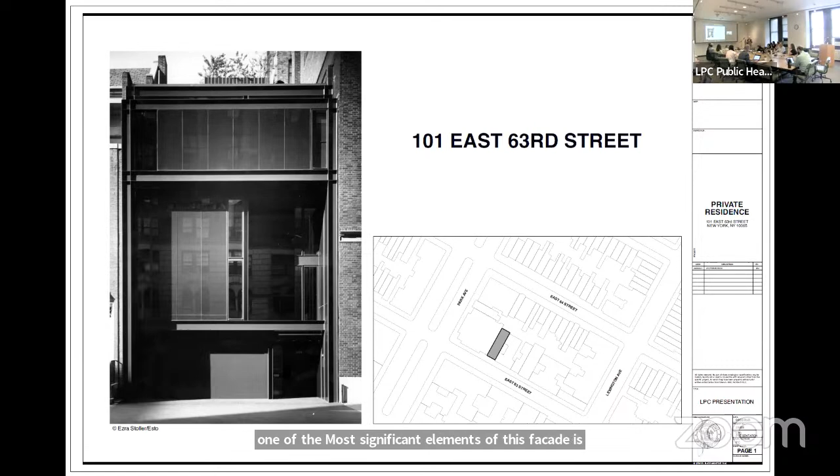And as a result of this, we've found some both logistical and security challenges. Because of the deep inset, it's been a place where people have gathered for smoking, public urination, and even frequently sleeping. Because the door opens to the outside rather than to the inside, there have been many times where the owner was essentially trapped in his home and was unable to leave because there were loiterers sheltering in the space.

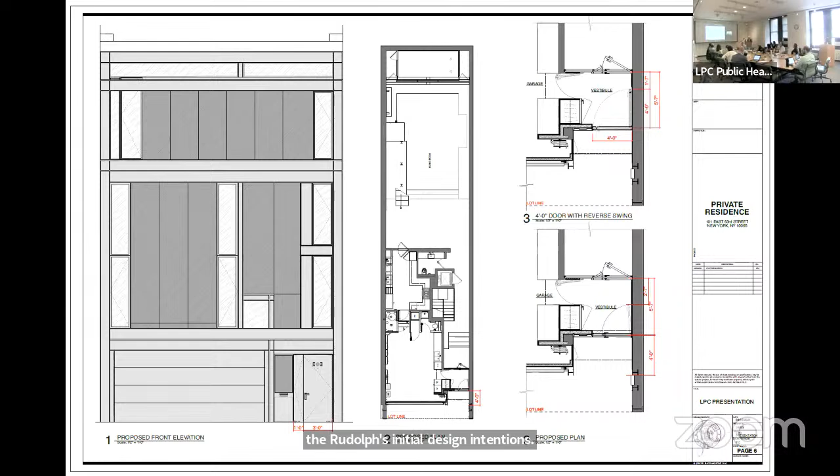Here you can see our new solution that we're presenting today. We're proposing to keep everything in the same plane that it is. The door remains in the same plane. However, what we would like to do is to split the door to create a 3-foot door opening that would open in. And this matches Rudolph's design solution for the interior vestibule. He has a split door there, which remains today. And so we would be duplicating that.

And the reason that we need to split the door is because the vestibule itself is rather tight. It's only 5'7" deep, and a 4-foot door opening into that space is just too congested. And it's also essential that the door open in so that if there is anyone sheltering in the exterior vestibule, the owner is able to open the door.

Up here you can see how much space the 4-foot door would be taking up if we were to just change the swing. And in the lower plan, we're showing the split door, which matches the door in the interior of the vestibule.

Now, in addition to the modification to the entrance door, I should also mention that we would be planning to reuse the existing door handle and address letters, which are original to the home, and we would replace them on this door. The door would be of the same material as the existing. It's a metal clad wood door that's painted to match the rest of the steel facade.

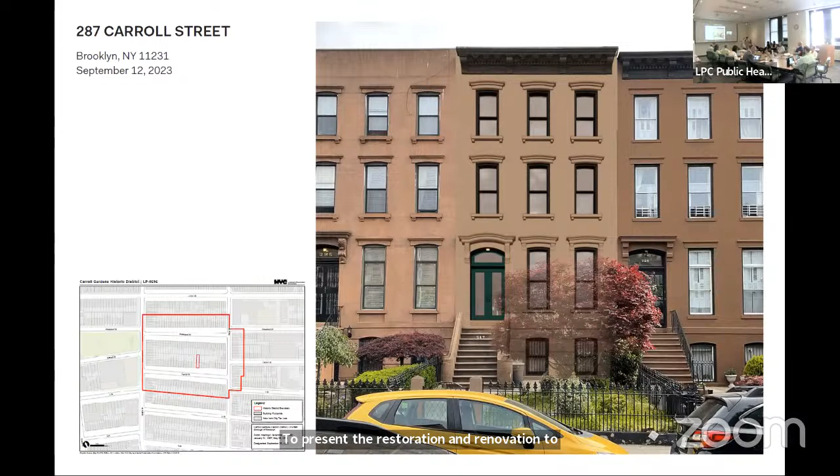The original building was built by William J. Bedell and dates back to 1874. We are proposing to renovate the property into a passive house that uses zero energy, with a new rear yard addition to allow additional space for the owners and their growing family.

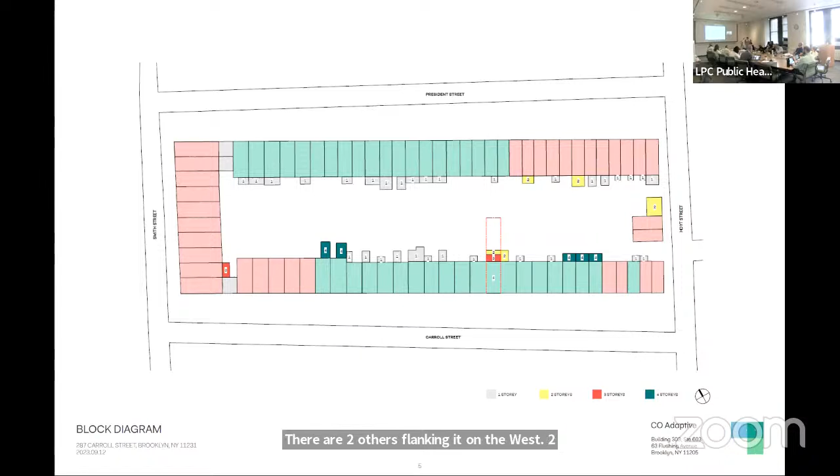This is the block diagram of this particular block showing 2 points of visibility from Hoyt Street. You will notice that there are 3 buildings, 297, 299, and 301 Carroll Street, marked in green, that are a little deeper than the historic neighbors and are 4 stories to the east of our property. There are 2 others flanking it on the west, 265 and 263, that also have 4-story additions, extending back further into the rear yards, although these are not full width.

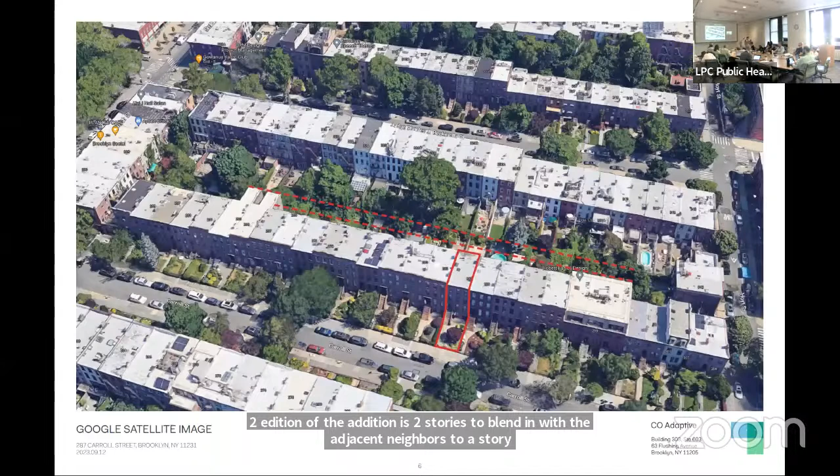We are proposing a tiered 3-story addition to 287 Carroll Street, highlighted on this block plan in red. The lower portion of the addition is 2 stories to blend in with the adjacent neighbor's 2-story addition. This Google satellite image gives additional context and shows the relationship of 287 to the deeper buildings on the east and west on the same block. It's worth noting here that the front facade has a deep 30-foot setback from the public street.

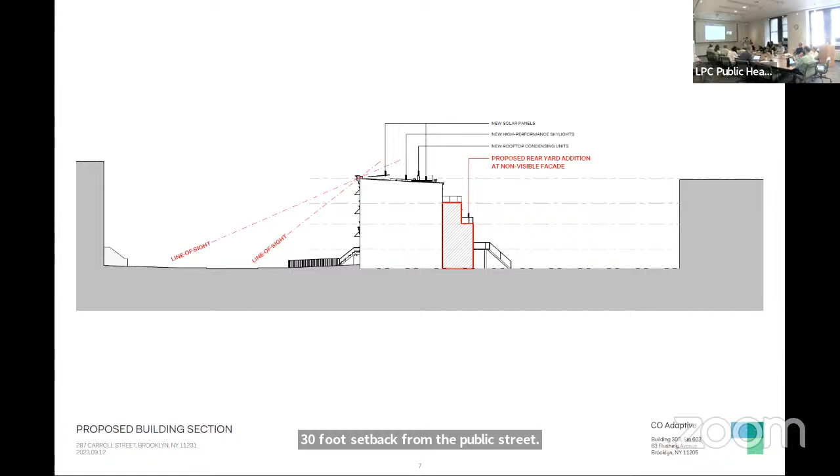This is the proposed building section. There will be new solar panels, skylights, and condenser units with guardrails on the roof, which have all been confirmed non-visible from Hoyt Street and will be reviewed at staff level. We've mocked up the extension shown here. You'll see that the 2 lower floors will extend as deep as the neighbor at 289 Carroll Street. We've also mocked up the roof additions and determined with the staff that they are not visible from the public vantage points.

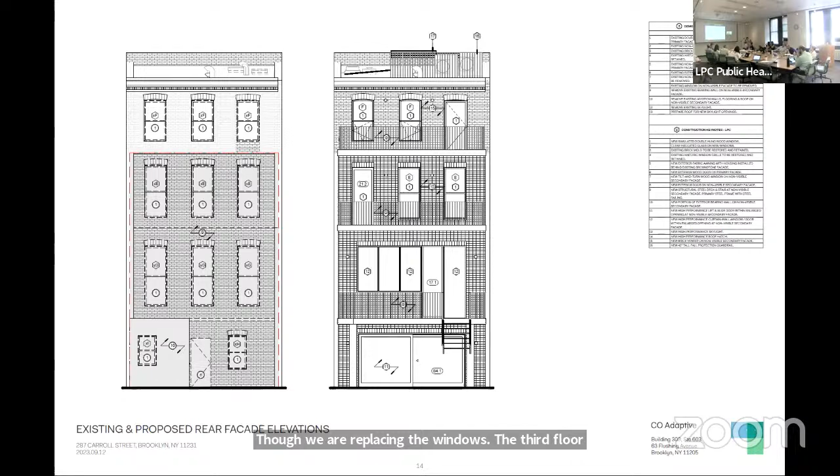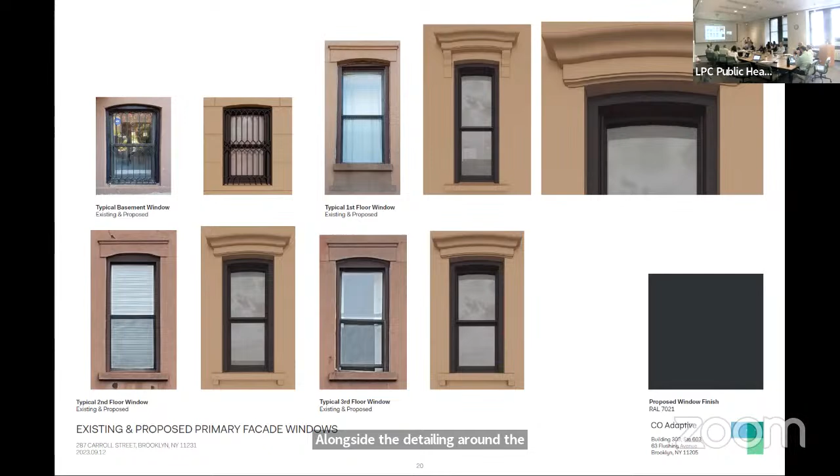The second and third floor front facade windows will also be replaced and set back the same distance. The stone detailing eyebrows at the lintel and sill will also be restored. We are proposing recessed awnings instead of surface mounted awnings to reduce their visibility when they are not in use. Traditional awnings are highly visible when they are not extended and require a significant amount of labor to retract and extend.

Our proposed recessed awnings would be able to be easily switched between extension and retraction, allowing for significantly easier maintenance for the building owners and easy operability between the two, allowing them to seamlessly switch between being able to keep the hot sun out in the summer and allowing the sun's energy to offset heating in the wintertime, without the need to dangerously hang out the window or use scaffolding to move them.

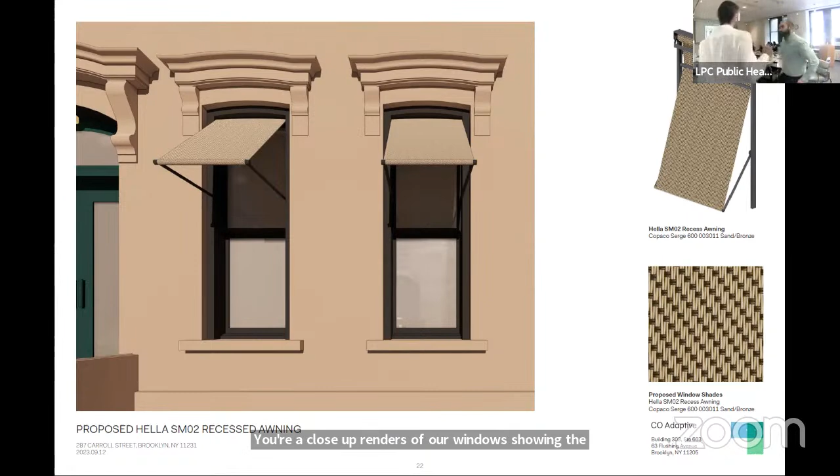Here are close-up renders of our windows showing the proposed glass pane setback, the extended awnings alongside window and shade colors. The shade hardware will be powder coated to match the window frames to minimize their visibility. So this shows them retracted. They become entirely invisible and slot behind the brownstone layer. Our proposed details on page right here show the proposed awning and the setback of the window.

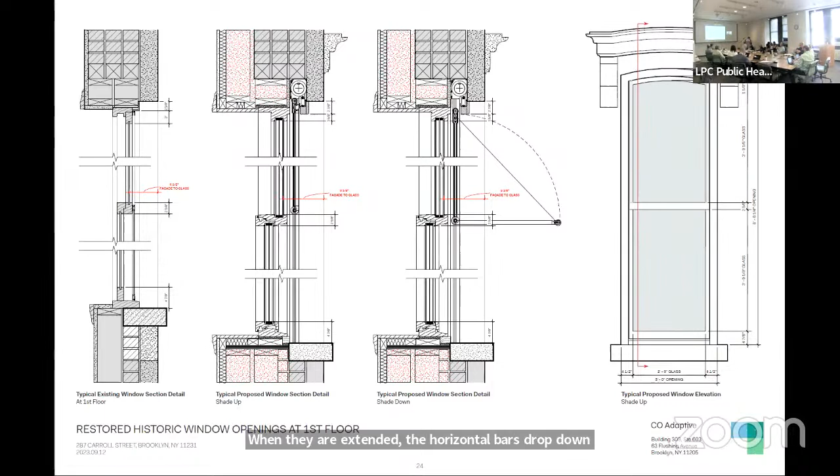The fabric awning can be completely recessed and invisible when they are rolled up and tucked behind the historic brick mold. The horizontal bars of the awning will be hidden behind the brick mold. When they are extended, the horizontal bars drop down to allow the awning arms to swing out, unrolling the fabric. The window opening on the parlor floor will be restored to its original opening size, as you can see here as well. These show the details of the second and third floors where the opening will remain the same. The detail otherwise is very similar.

Here are the existing and proposed window details in plan. As you can see, the face of the brick mold will remain in the existing position in relation to the facade, and the glass is set back a little bit further. And we've tucked the operable part of the awning behind the brick mold, so that is very invisible.

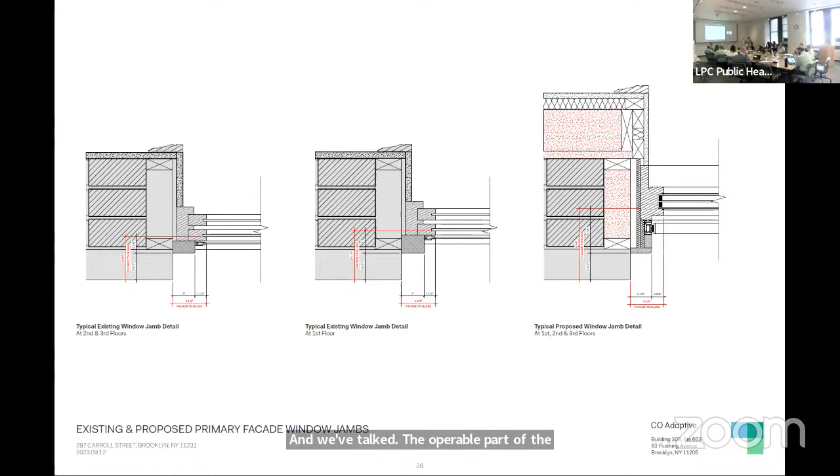its historic state, with a contemporary addition that allows the building to be more resilient in the ever hotter New York City summers. Exterior shading will mean that it can maintain its cool with minimal use of active air conditioning, which unburdens the NYC energy grid and works towards a less carbon intensive future. And with that, I open it up to questions.

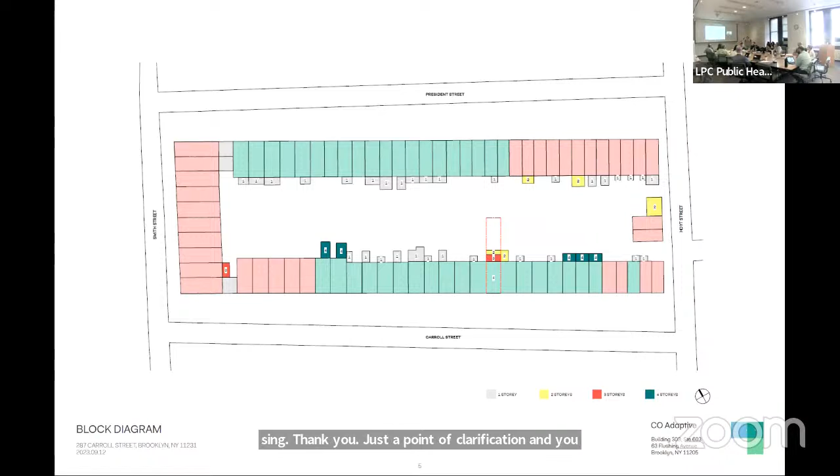Thank you. Just a point of clarification, and you could second this, but the buildings to the right are new buildings that I believe are full height and extend further, not rear additions. So there's really just the 2 to the left that are additions of that story. They go deeper. Yeah. Right, Commissioner Goldblum.

On your rear yard axonometric views, you have kind of a white stripe coping or something. What is that made out of? On top of the brick at the various setbacks. Like a sill or something. See what I mean? Yeah, it's just a break in the brick. It would probably be masonry as well. Should it be made out of brick also, or made out of stone? Stone, exactly. Got it. Thank you.

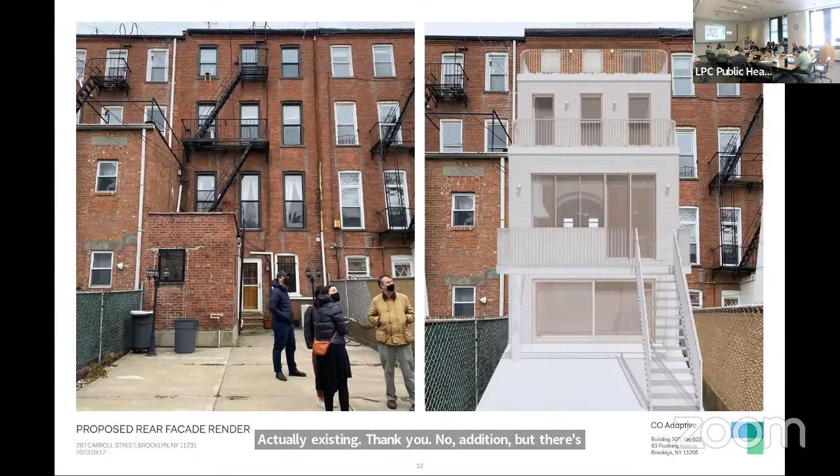All right. Yes, Commissioner Jefferson, and then Commissioner Lutfy. Commissioner Jefferson. The alignment of the existing backyard, your new addition, does it align or is it larger? It aligns with its neighbor. It does align? Okay, thank you. The two bottom floors, that is, the top floor then juts out beyond. And how deep is the top floor? I'm not sure that I have that dimension in here. I can probably answer that by looking it up for you. Okay.

Sure. Commissioner Lutfy. Yeah, this is sort of an information question. The shades, I'm just wondering how much more energy you save with the shades versus having solar shades on the inside. We found in mapping this out on other projects that we do, that exterior shading is in some way the biggest bang for your buck. If you were to do one thing on a building, that makes a humongous difference on the amount of energy that it reduces for cooling. Thank you. Okay, other questions?

All right, I don't see any other questions at the time, so we'll move to public testimony. And first, I'll just confirm, is there anyone in the room who wishes to speak on this item? All right, not seeing anyone in the room, I will turn it over to Gregory Kala to see if we have any remote participants. Thank you, Chair Carroll. We received one sign up in advance for this item, and I see two hands raised. So we'll first be hearing from Christina Conroy from the Victorian Society of New York. So Christina Conroy, I'm promoting you to panelist right now. If you could please state your name for the record and unmute your line, you'll have 3 minutes to speak. Thank you.

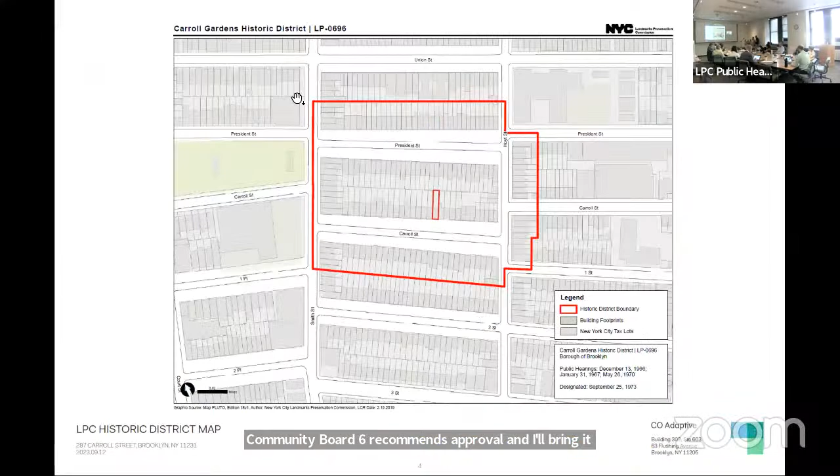And just to clarify for the Victorian Society, the aspects of the windows that we're reviewing. The rules do allow the staff to approve high performance windows that have a change in operation as long as the plane of the top sash and the plane of the bottom sash and their relationship to each other remains and matches the historic condition, as well as the profiles and details of the window, including the brick mold and the arch. The windows are before us today because they are being set back within the opening to accommodate the integral awning, which we're reviewing. And now I'd like to turn to the applicant and ask if you'd like to respond to the other comments in the testimony.

I just wanted to add, and maybe I'll go back to the images of the rear facades, that the reason why we propose the light brick is because a significant amount of the buildings on this block have been stuccoed or painted and are light at the rear facade. Okay. Commissioners, do we have any final questions? Yes, Commissioner Lutfy. Are those buildings across or are they next to the? This particular view is across. And then along here, you can see there's some that are in line with us that are also white or light gray. Thank you. All right, thank you.

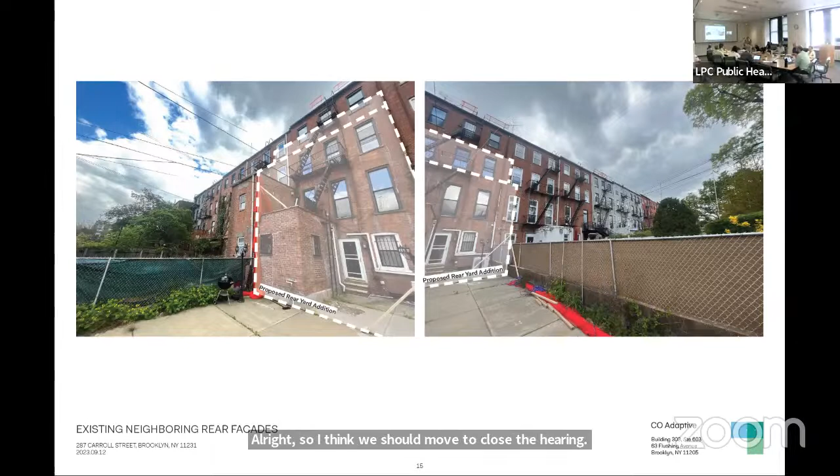Any other final questions? All right, so I think we should move to close the hearing and begin our discussion. Commissioner Master, would you make a motion to close the hearing? So moved. Thank you. And Commissioner Jefferson, would you second that motion? Second. All in favor, say aye. Aye. Any opposed? Okay, the hearing is closed and we'll begin our discussion.

And so as I said, on the front facade, we are only looking at the windows because of their setback location. And then we're looking at the integral awnings. And as we know, historically, row houses, as well as almost every other building type, did use awnings as a means of shade. So they are emulating the historic slope and shape of historic awnings. And then at the rear facade, we're looking at the tiered 3-story rear yard addition. And so we'll begin our discussion. Commissioner Ginsburg, would you like to start this one?

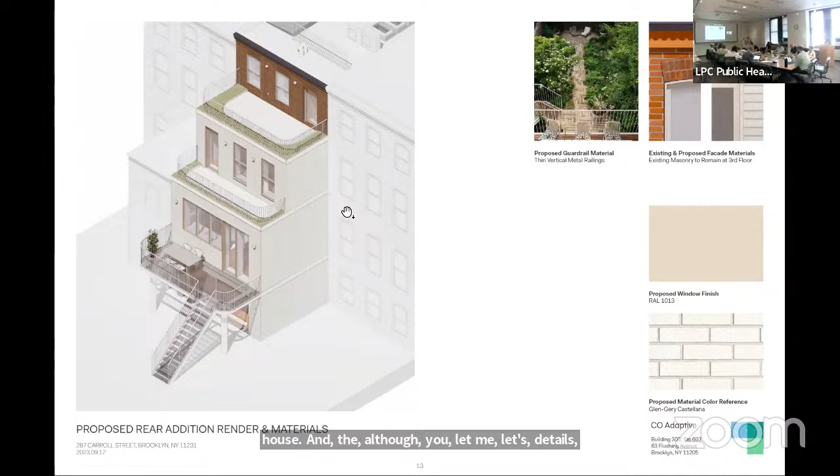Thank you. First of all, I want to compliment you on doing passive house, and although you didn't show it, had you not done passive house, those details looked good. I think the recess of those windows in the front of this is an elegant detail to deal with the need to shade it, and also putting the windows back just inherently will shade them by the building. So I have no issues with that or anything on the front facade.

On the rear facade, I have a feeling we're going to have discussion, but I don't mind the third floor addition. It is set back. The windows do line up with the existing windows. I question a little bit the bright white color, and maybe a light gray would be better. And I also question the banding at each floor with the stone, which looks to me to be a very modern detail and not necessary, and it could be simplified. But in general, I think this is approvable. Thank you. Thank you, Commissioner Goldblum. Okay, thanks.

Not only do I think that the awnings are appropriate, I think that there should be tax incentives, especially in historic districts, for awnings to be not required, but strongly encouraged in historic buildings. Apart from the obvious extraordinary energy gains that they provide, they are a part of New York City history that is completely lost. And I think that they should be on high-rise buildings.

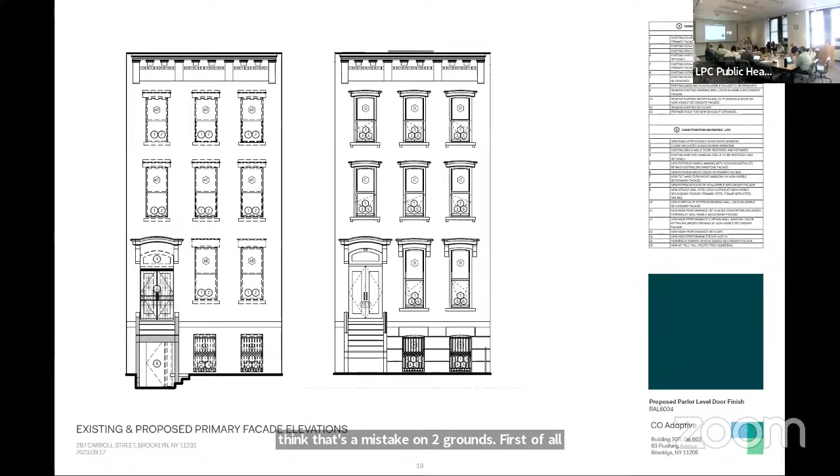I think they're great. The only thing I would suggest is that the color you've chosen is awfully, I don't know, self-effacing. I think that they're trying to look like stone, and I think that's a mistake on two grounds. First of all, they're not stone, and they shouldn't be stone. It would be bizarre to have brownstone infilling the windows. But I think also historically, they were a moment of expression of color and individuality in a typology that was characterized by uniformity.

So I think that you could work with staff on that. That's just a minor little thing, but more power to you, and everybody should do it. I'm going to steal that detail and use it if I get a townhouse. I think that you should look with the staff at the profile of those window heads. They don't look right to me from the renderings and the drawings, but if they are, then that's great.

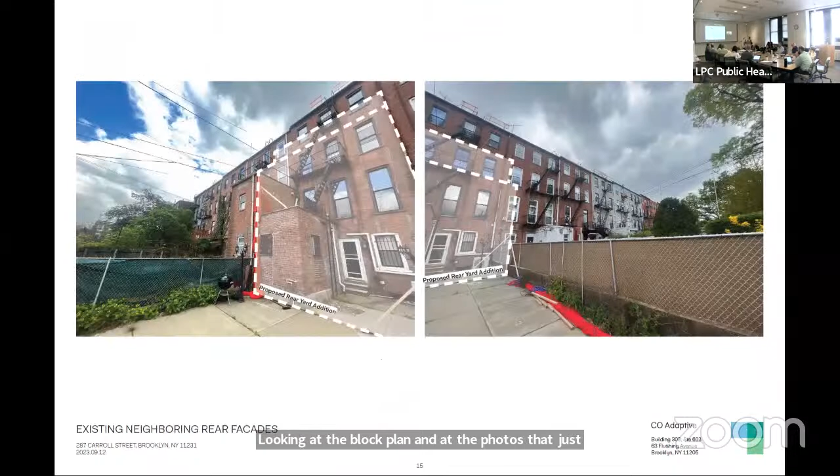In the rear yard, I am unconvinced that the third floor setback addition is appropriate. Looking at the block plan and at the photos that you provided that you just breezed by, even though you do have a few four-story structures, this rear yard is predominantly one story at the basement as a space. And I think that the fact that you have a neighbor with a tail kind of gives you a little bit of an in to do what you've done on the lower two levels. But I think that the third level is inappropriate.

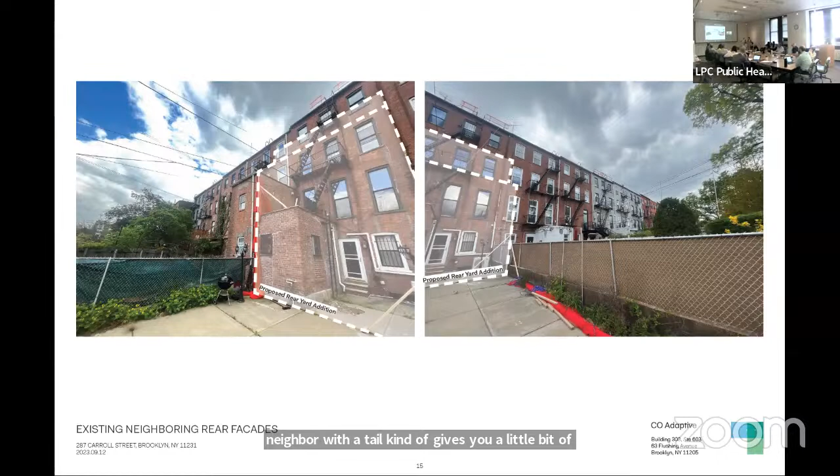The choice of the white brick, while at first I thought, ooh, that's a little unusual, I think in the light of what we permit in rear yard additions, it's rather restrained and totally appropriate, especially in the context that you've sited it. I too kind of had a weird feeling about that coping cap masonry stuff. But again, we kind of focus on little details when that's what's there to focus on. Had the project been much bolder and more assertive, we would have let stuff like that breeze by. So I don't think it's going to render it inappropriate. I think it's okay. Okay, thank you.

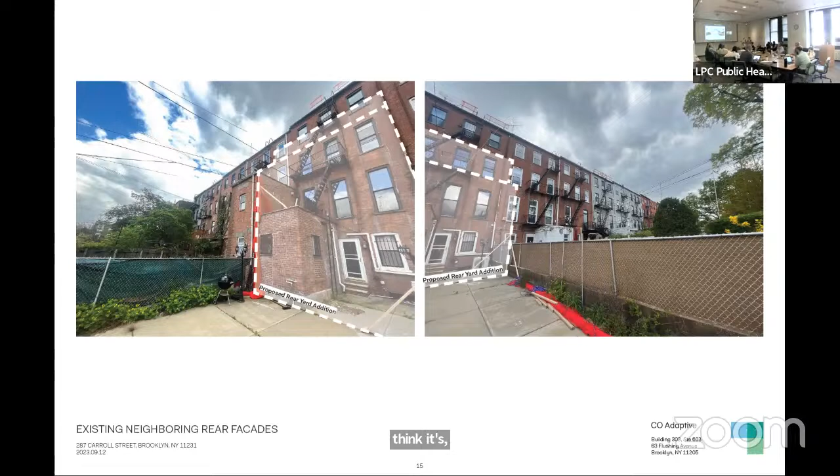Commissioner Holford Smith. Yes, thank you. I agree with my colleagues on their comments. I think the addition of the awnings is a great detail. I agree with Commissioner Goldblum that something that's not just trying to match the stone would be maybe not more appropriate, but maybe more interesting. And I also agree about the rear yard addition, that the third floor in this context is too tall, and the addition should be limited to the two stories.

I also think that a stark white brick is a bit of a contrast, even next to the painted brick and the stucco. So maybe a light gray, like Commissioner Ginsburg suggested, or something a little bit softer than bright white. I think that the stone detail is fine, especially if we eliminate the top floor. Okay, thank you. Commissioner Jefferson.

In terms of the window openings, replication of the eyebrow head is fine. I think that's great. Integral sunshade is appropriate, but I have issues with it in that in a historical block, these fabrics have an image, have a form, and they have a certain quietness to it. When I look at images of 1910, 1920 New York with these awnings, they're all over the place, different colors, different fabric. It becomes a very activated streetscape.

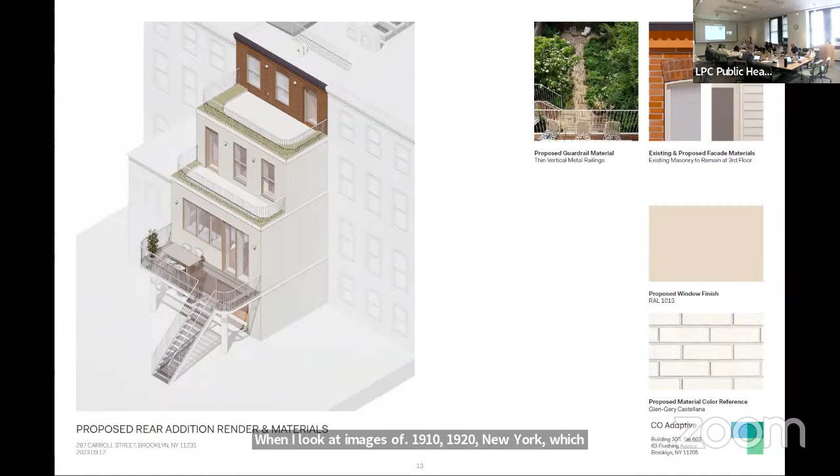Is that what we want? Is that what we're looking for? Or are we looking for a quietness that these brownstones bring? So it's a matter of atmosphere. And the diagram that was shown, everything with a monochromatic color, which is unfair. It's not going to look like that. So that's my concern. And I think it should be two stories instead of three. All right, Commissioner Master.

I agree with the other commissioners. Love the awning. I love the look. I think the front facade, even with the window setback, is perfectly fine. The real question I think here is the rear facade. I don't really have a problem with the white color. The question, of course, is the third floor.

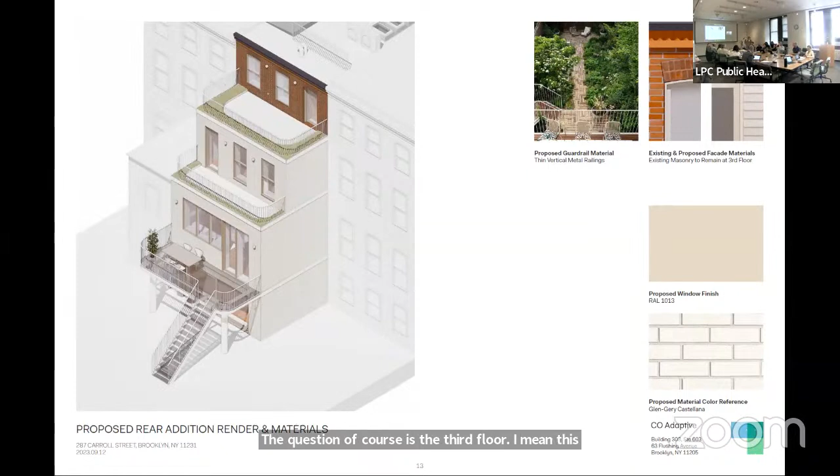This is a tough one. There seem to be other 4-story additions, not in the vicinity, but there, and then some 2-story additions. The thing that makes me more comfortable with the third floor rear addition is the massing; it is set back a little bit, and the rear yard is so deep that I think it would accommodate this rear yard addition. So I think I can find this appropriate.

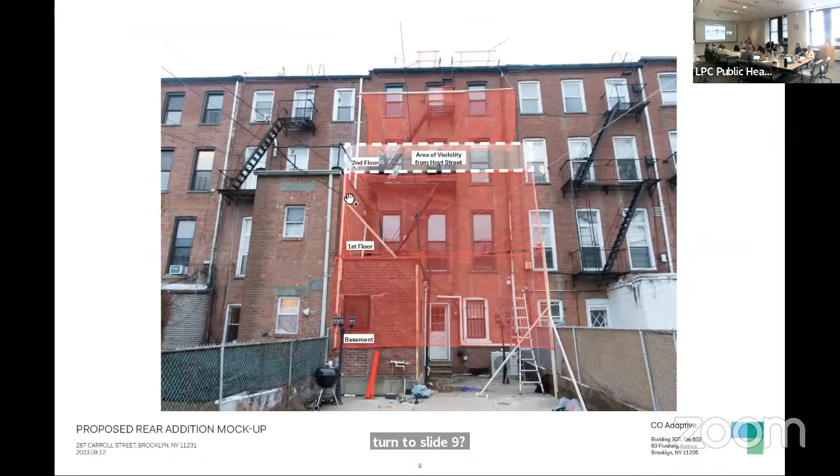Okay, thank you. Commissioner Lutfy. Could you please turn to slide 9? Oh, that was it. That's it. Thank you. Now that I've asked for that, I'm going to talk about the front first.

So I also want to commend the applicant on efforts to make this a passive house, especially in a brownstone, putting solar panels on the roof where there's not a lot of square footage. It's a great thing. I also think the concept of a southern exposure is just so tough from a heat perspective and also from a light perspective, having lived in many, and actually I've loved them. So the shade idea is a great idea, not only from the heat standpoint and the light standpoint, but it is a lovely throwback to something that existed before. And it's so funny that sometimes the original way of doing things is the best way.

But I happen to agree with Everardo that right now in New York City, these brownstone neighborhoods are fairly uniform and look kind of handsome that way. And so my recommendation is that the shade actually be more understated in color, because it's not like tomorrow everybody's going to start doing this. And in fact, who knows how many people will actually pick it up. But I think it would be nice if you don't really disrupt visually what's going on on the street. So does that mean you're comfortable with the brown color? I am. Okay. I actually am very comfortable with it.

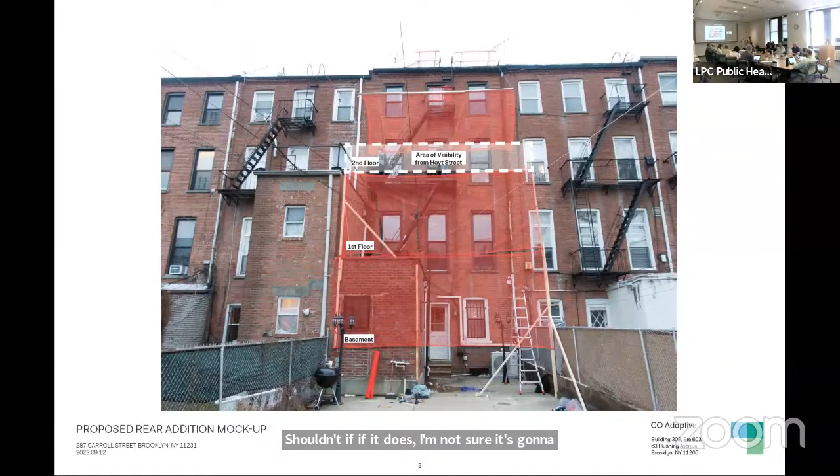The question of the third floor in the rear, I'm a little up in the air on it, as was Commissioner Master. I think because of the size of the block, notwithstanding the fact that the neighbors don't have it yet, it could become a model for how to do it. It is set back. That's helpful. I'm not sure it's going to make it, but if it were not white brick, but a red brick, I wonder if that would help it.

Commissioner Chen. Yeah, very interesting comments by the colleagues. I think we're in agreement at the front. The awning is very nicely done, and I tend to agree with Jeanne that the color should not be popping out. I think it should be more contextual. I agree about the two-story on the base, that on this side there seemed to be more of the brick tone versus on the opposite side the white color.

And if the majority think that the base should be of a lighter color, then I go with the earlier comments that it should be off-white, not so bright. I'm sort of ambivalent about the third floor. I see the struggle here, and so I would defer to the majority.

Okay. So I think we actually have a lot of different comments, and we've come down with enough support for the awnings as proposed in the color as proposed, and enough support for the white brick and banding at the rear yard addition. We are split, however, on the height of the addition. We're sort of split 50-50 on that.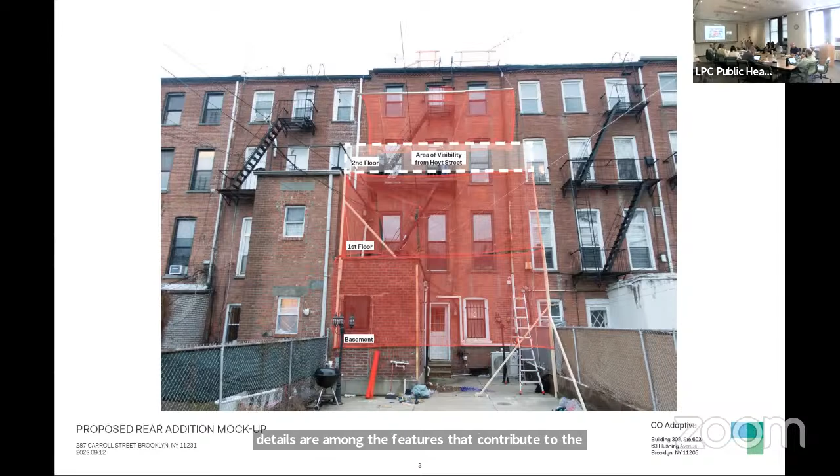I recommend approval with modifications, finding that the construction of a rear yard addition will not damage or eliminate any significant architectural features of the rear facade, that the rear yard addition will only be minimally visible through a gap in the street wall on Hoyt Street and will be seen within the context of neighboring additions, that there are other additions that extend into the center of the block as deeply as the proposed addition, and the work will not diminish the block's central green space, that the design and materiality of the rear yard addition featuring white brick cladding and metal railing will blend with the other brick and stucco rear walls

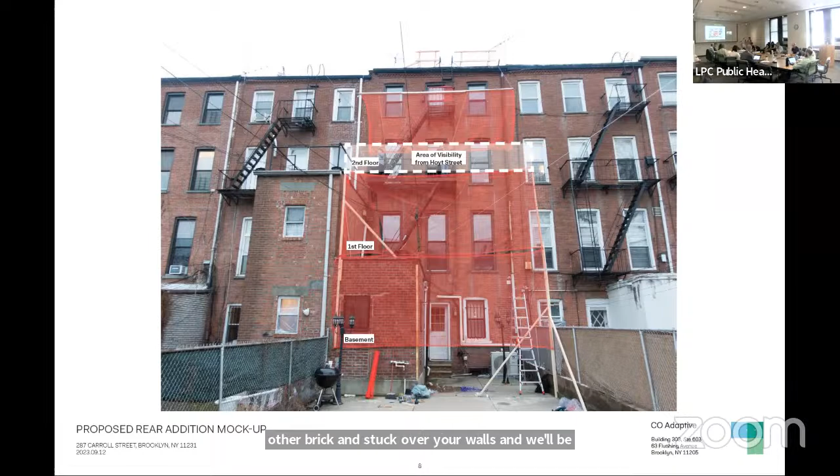and will be in keeping with the residential scale and character of the other buildings in the block, that the built awnings at the windows in the front of the facade will fit neatly behind the brick mold, and in the stored position, the rolled fabric will be hidden above the top rail of the curved sash without obstructing the curve of the window frame, and that the building is set back approximately 30 feet from the sidewalk, so the changes in the depth of the window within the facade will be difficult to discern from the public thoroughfare.

However, I find that the proposed 3-story rear yard addition is taller than the majority of the other rear yard additions within the block, where there are few additions taller than 1 story. Therefore, I recommend that the rear yard addition be lowered by 1 floor to better relate to the other rear yard additions within the block. Right, and I also want to just note that the commissioners who supported the light brick did ask for it to be light gray instead of a bright white. So please work with the staff on final sample color choices.

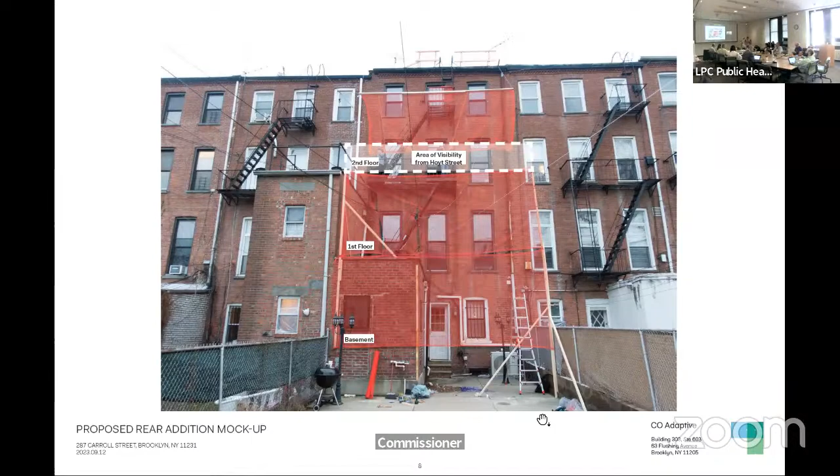Okay. All right, Commissioner Chen, would you second that motion? Second. Mark, will you call the vote? Chair Carroll, Aye. Commissioner Bland, Aye. Commissioner Chen, Aye. Commissioner Ginsburg, Aye. Commissioner Goldblum, Aye. Commissioner Jefferson, Aye. Commissioner Lutfi, Aye. Commissioner Master, Aye. Commissioner Holford Smith, Aye. With 9 in favor and none opposed, the motion passes. All right, that's approved. Thank you. And please continue to work with the staff.

All right, we move to the next hearing item. Next item is public hearing item number 2, LPC 22-11107. This is an application for a certificate of appropriateness in the Borough of Queens, block 1277, lot 58, 35-25 77th Street in the Jackson Heights Historic District. A neo-Georgian style apartment building designed by Joshua Tabachnik and built in 1936. And the application is to establish a master plan governing the future installation of windows.

Good morning. I'm Doug Lister. I'm the architect for this project. I'm presenting two buildings, 3525 77th Street, and then I'll immediately follow with 3524 78th Street. These two buildings are part of... I'm sorry, I'll go to the... sorry. So the two buildings are very similar.

On the left, there's a 1940s tax photo, and on the right are the existing conditions of 3525 77th Street. As you can see, the building originally had steel casement windows, and we believe that all of the steel casement windows were replaced in the 1980s. There's no remaining original fabric. And these are photos. Excuse me, I'll go back.

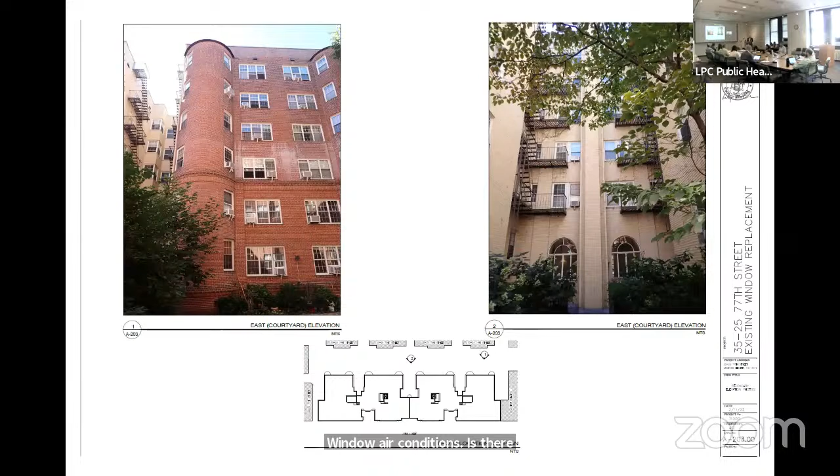I think I'm ready to go on to the next building. It's a very quick presentation. Okay. We're not going to go into that one until we act on one, and then we'll do the other one. Okay, sorry. All right, but it's a block of multiple buildings that were built in a uniform neo-Georgian design with all of the same windows and details. And so we're going to look at this one application, and I think we can apply our decision to the next application. So, commissioners, are there any questions?

Are there drawings of the proposed windows? And are there any changes to what's there, or is it just like, oh, there we go. So the original, I'll show you some details. Yeah, I'll just quickly. The original details do not have a brick mold of any sort. It's just a flat perimeter. And we proposed to replicate the brick mold that is on the original building on 35th Avenue, which is one of the three buildings which we're not presenting today because it does not require a public hearing.

And where is that brick mold on these drawings? Right here on the proposed, and also on the plan. Right, it's right in here. This is the original, or the existing shows no brick mold at all. It's just flat. Again, that's a replacement window.

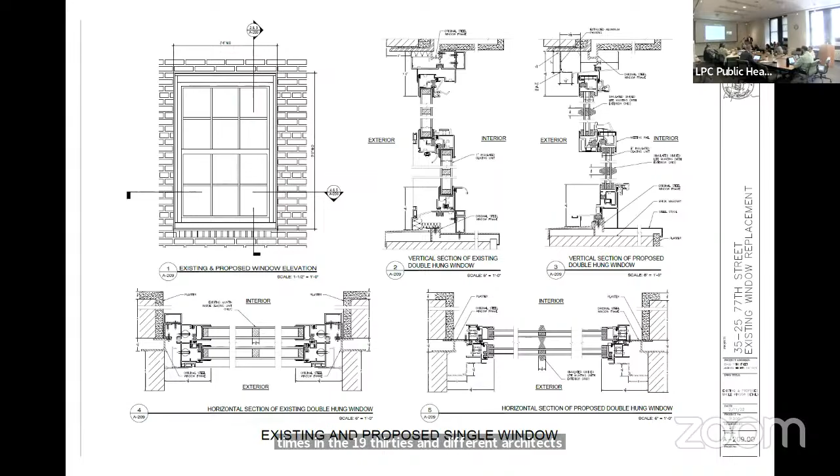All right, let's see if we have public testimony. Is there anyone in the room who wishes to speak on this item? Please come up to the mic and state your name for the record, and you'll have 3 minutes to speak. Okay.

Good morning. My name is Wanda Chin. I'm pleased to have the opportunity to speak at this public hearing with the commissioners. And thank you so much for your dedicated service.

I've been a lifelong resident of Queens County, and I've been a resident and property owner in Jackson Heights since 1986. I remember purposely seeking to purchase in the original garden co-ops back then. And I remember well the creation of the historic district in 1993. I was very actively involved with the community in creating that district.

I have been a shareholder of Burke Owners, which is the cooperative that owns these three buildings, which is 288 units. I've been a shareholder since 2013. I've served on the board of directors for 5 years and currently serve as treasurer. I'm in favor of our proposals for these two buildings, which is LPC 22-11107 and 22-11105. I know we're doing 78th Street next, but I'm speaking about both.

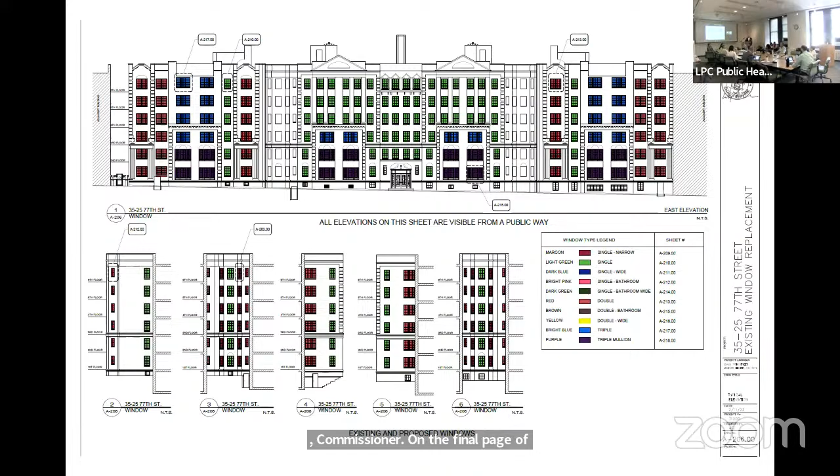Great, thank you very much. Okay, I'd like to ask if you'd like to address any of those comments by the community board. Okay. Commissioners, do we have any final questions? Yes, Commissioner Holford Smith. On the final page of your proposal, there's a sheet of photographs that shows some decorative conditions that haven't been addressed, I don't believe, in your presentation yet. Are you replicating these details?

And we are going to, so there are 12 windows on the front of the building. They're triple bay windows on the first and second floor. And we're going to restore this wood trim, the jambs and the wide mullions on those windows. If I can, I'll go through the... Hold on just a second. So the windows will sit in between those pilasters? Yes, the windows sit in between the...

Sorry, I'm not able to go through the... Pressed the wrong button. There is an elevation that shows... you've got it. That's it. Yeah. Perfect. This elevation shades the 12 windows that we're talking about, and they have wood Neo-Georgian details, and those will be approved. I think they can be approved at staff level. That's why I didn't talk about them during the presentation. Great. Thank you. We're going to restore those.

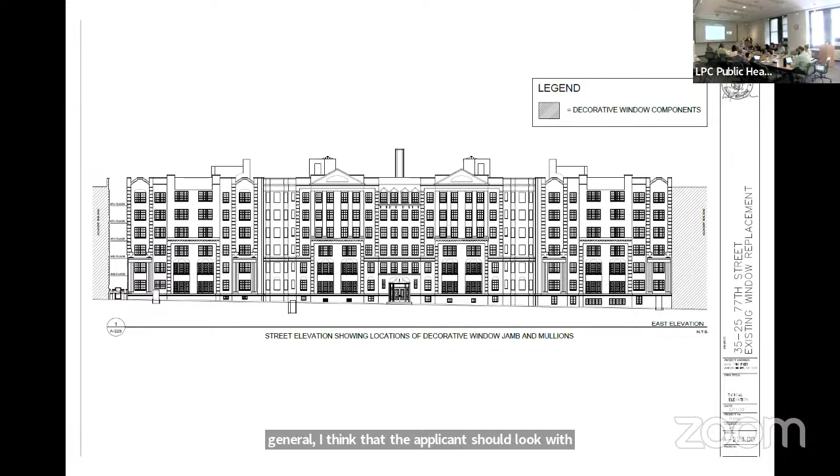I think that the 4.5 inch mass of metal left and right and above these windows is rather heavy, and it may comport with what's there now, which itself is a replacement window that is clearly shown as being kind of cladding over the steel frames that remain. But I don't think that's necessarily our standard.

And looking at the photos of the other buildings, they look to me anyway like the sight lines were better. And I am on the Marvin website. Their typical sight line is 3.5 inches or 3.25 inches. So I think that it would not be very hard to achieve a better sight line and to look at the brick mold.

And the last thing I'm kind of curious about is there any data on the color of the steel windows? My guess from the photo is that they weren't white, but I don't know. From a style perspective, white was probably the way to go with this style, but I don't know. It might be interesting to know that.

All right, thank you. And just to be clear, those larger wood windows are to be restored at staff level. But we can certainly have staff look more closely at the final, so use them as kind of a model for what goes on elsewhere. Understood. Commissioner Holford Smith.

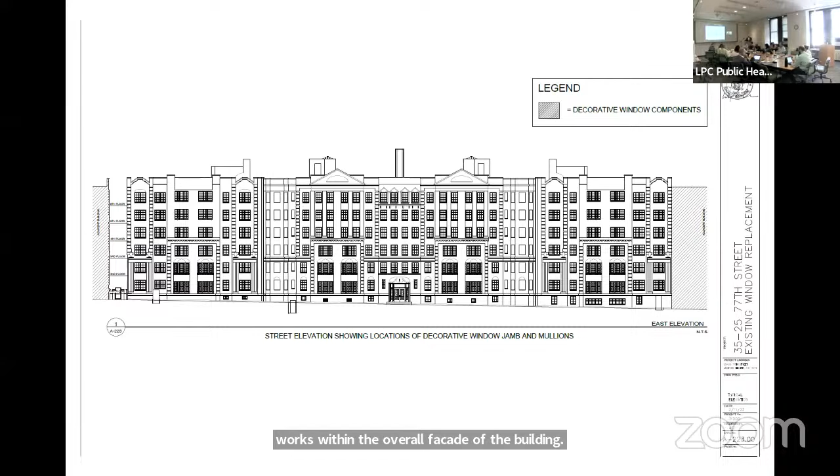That said, I think the most important thing here is the uniformity and making sure that the original 6/6 is going to remain and be consistent, and that it works within the overall facade of the building. I think double hung windows are easier to live with.

And I'm just going to say this in a joking way: not only is it what everyone has, but we're fine with it. The world is getting hotter. People need air conditioning. They need it to be easy. And I think the double hungs are absolutely fine.

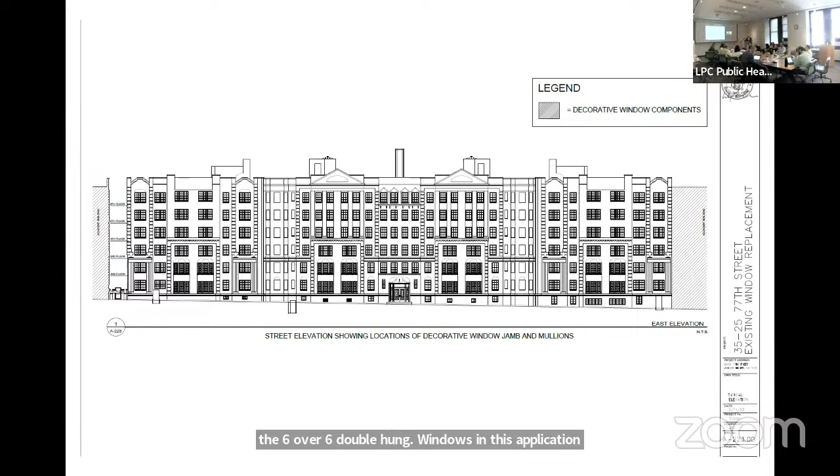All right, so I think we do have a consensus to support the 6/6 double hung windows in this application, but with the condition that they work with staff on the dimension and profile of the brick mold. Vice Chair Bland, would you be able to make that motion?

Seven. 35-25 77th Street, Jackson Heights Historic District. This is a Georgian style apartment building designed by Joshua Tabatchnik in 1936, and the application is to establish a master plan governing future installation of windows. I note that the building's scale, style, materials, and details are the features that contribute to the special architectural and historic character of the Jackson Heights Historic District.

I also note that the historic multi-light steel casement windows were replaced by triple single multi-light double hung windows with a white finish by the designation. Recommend approval that all historic casement windows were replaced prior to designation, that the proposed multi-light windows will maintain the scale and articulation of the original fenestration, that the proposed 6/6 double hung windows with extruded profiles arranged as paired and triple assemblies.

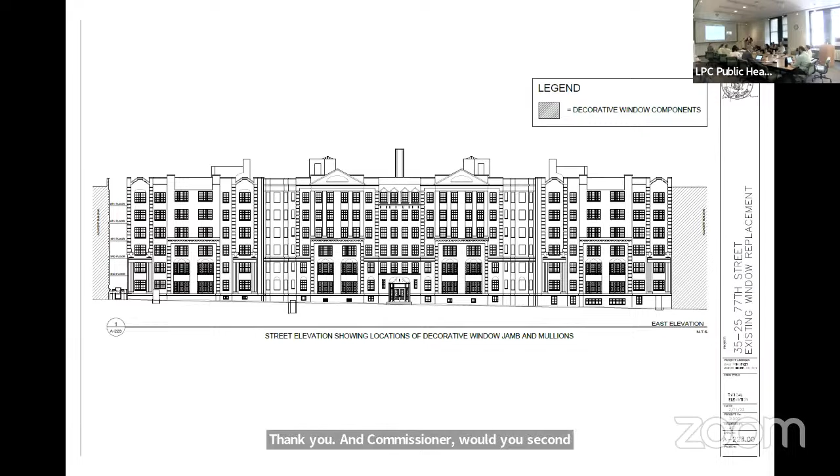Thank you. And Commissioner Lutfi, would you second that motion? Second. Mark, will you call the vote? Chair Carroll. Aye. Commissioner Bland. Aye. Commissioner Chen. Yeah. Commissioner Ginsburg. Nay. Commissioner Goldblum. Aye. Commissioner Jefferson. Aye. Commissioner Lutfi. Aye. Commissioner Master. Aye. Commissioner Holford Smith. Aye. With 7 in favor and 1 opposed, the motion passes. All right, so that's approved.

And we'll move to the next item. Right, and this is the second building in this complex, as the architect previously noted. I'll go ahead and read it into the public hearing. Item number 3, LPC 22-11105, application for certificate of appropriateness, borough of Queens, block 1277, lot 12, 35-24 78th Street in the Jackson Heights Historic District, a neo-Georgian style apartment building designed by Philip Birnbaum and built in 1938. The application is to establish a master plan governing the future installation of windows.

This is very similar to 35-25 77th Street. On the left is a historic photograph. There's actually 2 buildings. This building to the extreme left has double hung windows; that's not under consideration. This is the building here, 35-24 78th Street, that had the steel casement windows. And then to the right is the existing conditions showing the double hung windows. Again, I'm going to go through this pretty quickly.

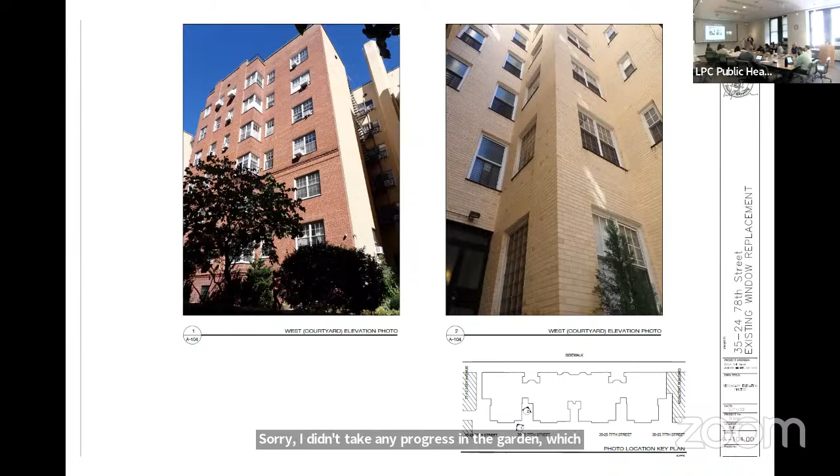On the left is the third building in this complex, 77-12 35th Avenue. On the right is a historic photograph of the buildings directly across the street, 35-25 78th Street, Hampton Court Garden, showing their original double hung windows in a neo-Georgian style. These are existing conditions photographs of the street elevation. Entrance and setback, the street elevation. And these are rear elevation photographs. Sorry, I didn't take any photographs of the garden, which is really one of the most distinctive parts of these buildings. This is the street elevation of the building. That's all I have.

All right, commissioners, any questions? It's another neo-Georgian building in the block that had casement windows, and they're proposing the 6/6 double hung window, similar to the last application. So if there are no questions, I think we've heard testimony on both applications, but let's just see if there's anyone who wants to speak specifically on this application. Yeah, I think she covered it in the first one. And if any member of the public would like to speak on this building, please raise your hands now. Okay, I do not see any hands raised. And as mentioned before, Queens Community Board 3 recommended conditional approval. So I will bring it back to you, Chair Carroll.

Great, thank you. All right, commissioners, if there are no final questions, maybe we should move to our discussion on this one. Let's make a motion to close the hearing. Commissioner Lutfi, would you make the motion to close the hearing? So moved. Vice Chair Bland, would you second that motion? Second. All in favor, say aye. Aye. Any opposed? Okay, the hearing is closed, and this is very similar to the last application. They are proposing a window configuration and operation that is consistent with the neo-Georgian style, but doesn't match the historic casement operation. So Commissioner Jefferson, would you start this one?

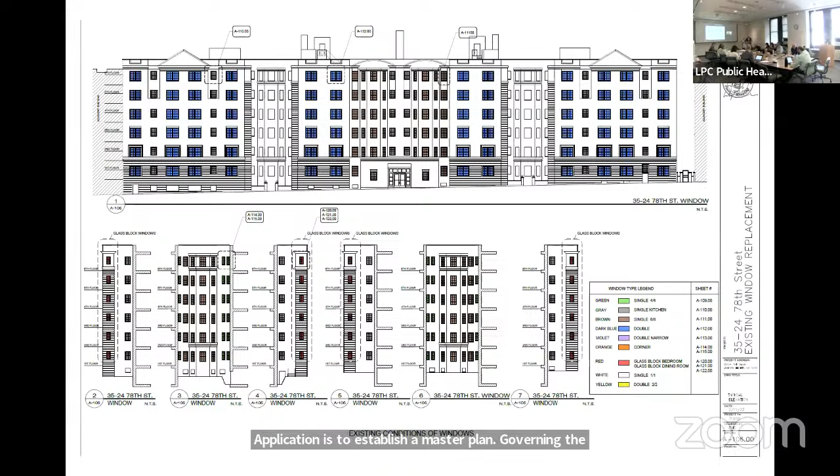I note that the building style, scale, material, and details are among the features, excuse me, that contribute to the special architectural and historical character of the Jackson Heights Historic District. I further note that the historic multi-light steel casement windows were replaced by triple, paired and single multi-light double hung aluminum windows with a white finish prior to designation. I recommend approval,

finding that all the historic casement windows were replaced by the time of designation, that the proposed multi-light windows will maintain a scale and articulation that recalls the original fenestration, that the proposed 6/6 double hung aluminum windows with extruded aluminum profile panning, arranged as paired and triple window assemblies and single units, will be in keeping with the operation, configuration, and detail often found in Neo-Georgian style apartment buildings and will harmonize with the other buildings in the streetscape.

That the white finish of the windows will relate well to the Neo-Georgian style of the building, and that the implementation of the window master plan will maintain and reinforce unity of the fenestration over time. Thank you. And Commissioner Holford-Smith, would you second that motion? I second it. All right, Mark, will you call the vote? I think we need to add the stipulation about working with staff on the details. And that this is conditional on your continuing to work with the staff on the dimension and profiles of the brick mold panning. All right, Mark?

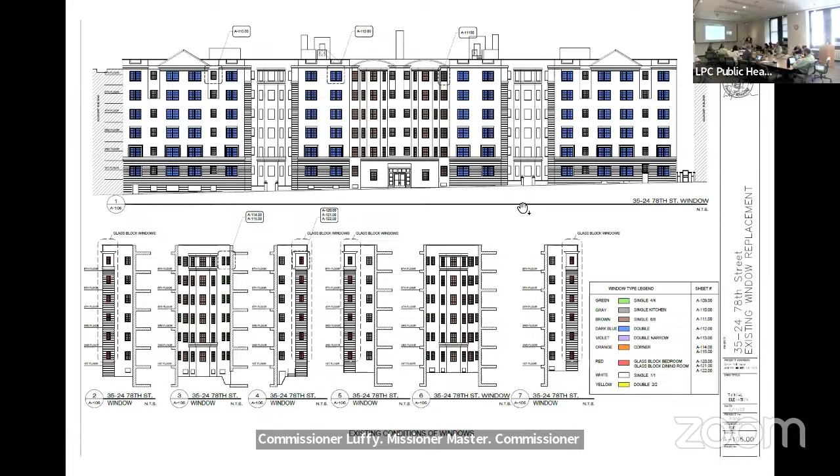Chair Carroll, Aye. Commissioner Bland, Aye. Commissioner Ginsburg, No. Commissioner Goldblum, Aye. Commissioner Jefferson, Aye. Commissioner Lutfi, Aye. Commissioner Master, Aye. Commissioner Holford-Smith, Aye. With 7 in favor and 1 opposed, the motion passes. It's approved. Thank you. All right, we'll move to the next item.

Next item is public hearing item number 4, LPC-23-07926. An application for certificate of appropriateness in the Borough of Queens, block 1448, lot 21. 34-30 88th Street in the Jackson Heights Historic District. This is an Anglo-American garden home, Neo-Georgian style row house designed by C.L. Verone and built in 1925 to 26. The application is to construct a rear dormer.

Good morning, Commissioners. Richard Lai, Preservation Staff. I will be presenting and the architect Robert Kudock is here to answer any questions. So the subject property is located on the western side of 88th Street, midway between 34th and 35th Avenues. The proposal is here before you due to the visibility of the rear dormer and that the work will require the removal of a portion of significant roof terracotta tiles.

And as you can see from the block plan, there are a number of single, double, and triple front and rear dormers, several that were in existence at the time of the 1940s tax photographs. And the commission also approved one, which is this property in the row, in 2015.

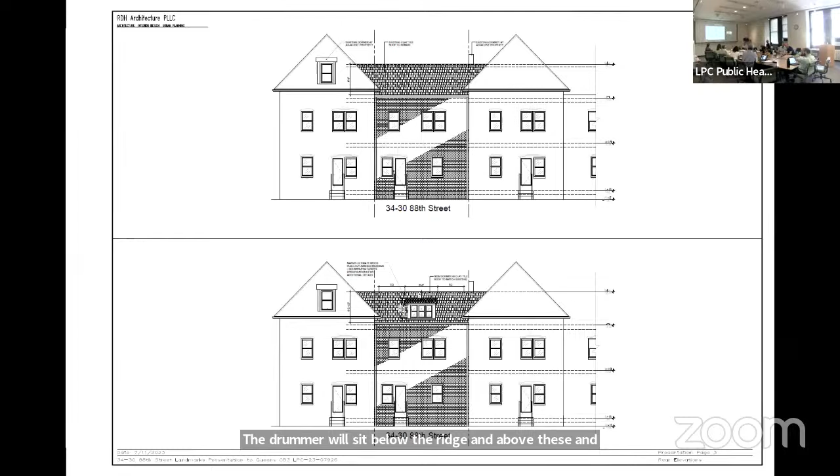The proposed dormer will be constructed of light cream painted wood framing and clapboards with salvaged and new terracotta roof tiles. The dormer will sit below the ridge and above the eaves and centered along the rear pitched roof. The dormer will feature 3 light cream painted awning windows featuring a simulated meeting rail. Here is the roof plan and section showing the dormer will sit below the ridge and above the eaves. Here's an enlarged roof plan. And here is an enlarged section.

And here is a photo from 88th Street looking through a break in the row at the rear pitched roof of the subject property over the central green space. And it's in this location where the proposed dormer would be situated. And here's the same picture, just with the scaled overlay showing the approximate position and design of the rear dormer.

And just a zoomed in shot from the same vantage point. And again, with the overlay, just showing what it would look like. Thank you, commissioners. The architect, Robert Duck, is here to answer any questions if you have any. All right, thank you. We'll see if we have any questions. Any questions? All right, I don't think we have any questions. Thank you, Richard. So we'll move to public testimony.

Is there anyone in the room who wishes to speak on this item? All right, not seeing anyone in the room, I'll turn it over to Gregory Kala to see if we have any remote participants. Thank you, Chair Carroll. We did not receive any signups beforehand. However, if you would like to speak on this item, please raise your hands now. Okay, I do not see any attendees raising their hands.

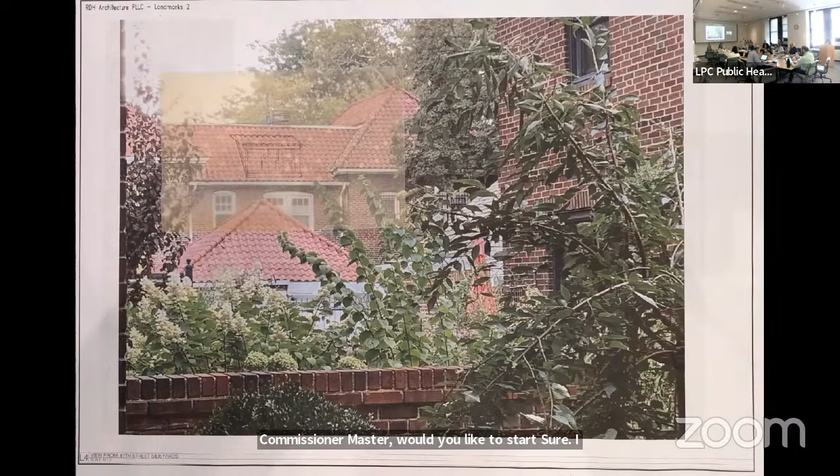Sure. I find this proposal very modest. We're just adding a dormer window in the rear. And there are other dormers in the nearby neighborhood. So it almost looks as if it really belongs. And I don't think it's very visible from public thoroughfares. So I can find this appropriate. Okay, thank you. Commissioner Lefty? I agree with Commissioner Master on all counts.

I think it's appropriate. Vice Chair Bland? Well, it's been there from the very beginning, so I think it's appropriate that it be added. All right, Commissioner Ginsburg? I agree with my other commissioners, appropriate. Commissioner Goldblum? Great, appropriate. Commissioner Holford Smith? Agreed, appropriate. And Commissioner Jefferson. Okay, so I think we all are in agreement. Commissioner Master, would you make the motion? Sure.

In the matter of LPC 23-07926, 3430 88th Street, Jackson Heights Historic District. An Anglo-American garden home, neo-Georgian style row house designed by C.L. Verone and built in 1925, 1926. Application is to construct a rear dormer.

I note that the building scale, style, materials, and details are among the features that contribute to the special architectural and historic character of the Jackson Heights Historic District. I recommend approval, finding that the work will not damage or eliminate any significant architectural features, and only a small area of the terracotta roofing will be removed.

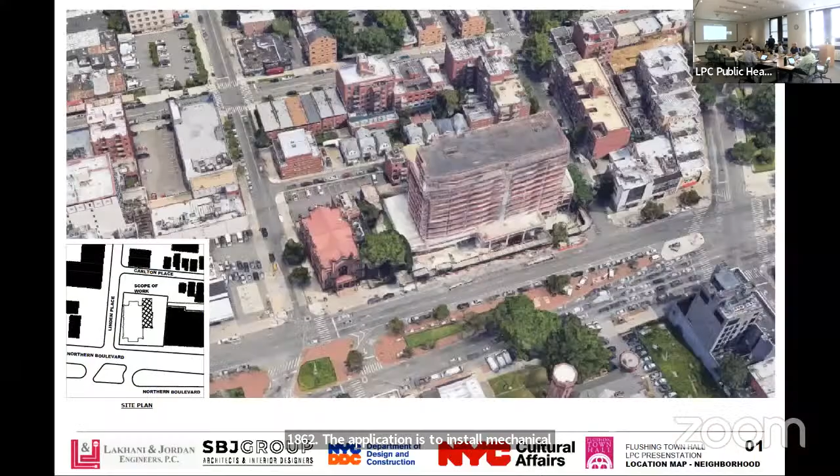That's it. Great. Okay, good morning. I'm Alec Jacobs, a principal with Stephen B. Jacobs Group. We're representing Lakhani and Jordan Engineers, who are the prime engineer on this project, as well as DDC, New York City Department of Cultural Affairs, and Flushing Town Hall itself. This application is a relatively simple one for us to replace some mechanical equipment on one of the roofs and to do some parapet extensions and repairs.

The building is a Romanesque revival building built in 1862. It's located on the corner of Northern Boulevard and Linden Place. The building's undergone several renovations over the years and 1 or 2 additions. There's primarily a small addition over here to the east that was built in 1892. And then another addition that was built in 1936 in the corner of the building that was built as holding cells for prisoners when the building functioned as courthouse. Later, a third-story addition was added to that, and mechanical equipment was added to that small addition.

Let me scroll a little further. So there's some other views of the building. Our work is solely focused on these 2 roofs of the additions, and the only one that's really of concern that requires full board approval is the replacement of this equipment on the northeast corner roof. So the whole plan is to replace this piece of mechanical equipment on the roof with an element that's going to be higher, and to extend this brick parapet another 3 feet to conceal the equipment and to provide for life safety equipment that's needed.

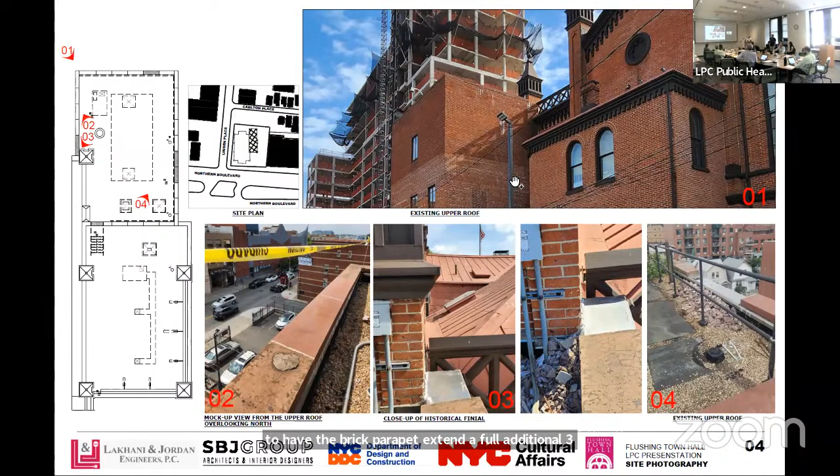That's the lower roof where we're doing some minor work that is not subject to full board approval. This is the higher roof. So as you can see, the parapet that we're planning to extend in place has been badly deteriorated. Instead of having a railing, we're going to have the brick parapet extend a full additional 3'6" to provide for current OSHA requirements. And I'll show better views of the equipment as we go further. That's as much of the view of the existing mechanical equipment you can see right now.

The proposed equipment is going to be approximately 4 feet higher. We did some mock-ups. As you can see, the only place you can see this equipment is about 500 feet away across Northern Boulevard, and you'd have to hit a very specific angle to actually see it. This is the equipment being replaced with the mock-ups of where the new equipment would extend to, which was an additional 4 feet. This is the extension of the brick parapet that's going to occur along the north and east and west elevations.

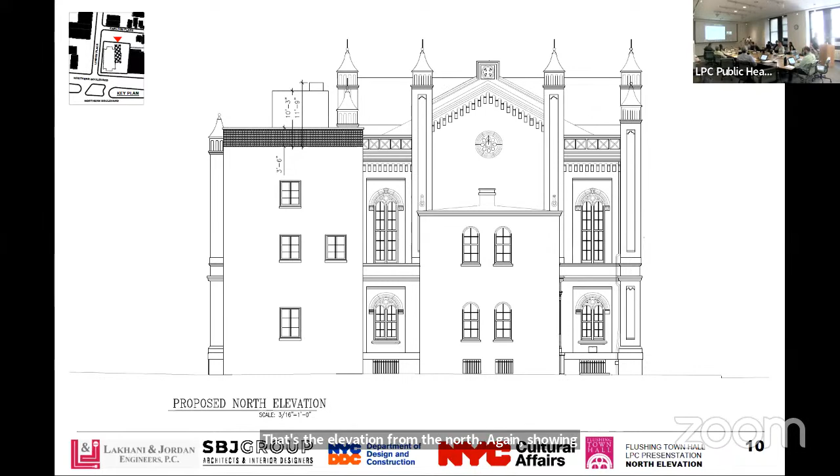That's the current condition. This is where the existing mechanical equipment is now. And this is the proposed equipment. As you can see, it hits the same footprint as the existing. That is the elevation from the east, showing the extension of the equipment and the extension of the parapet. That's the elevation from the north, again showing the extension of the parapet and the equipment, and as well from Linden Place.

And I've got really one more relevant slide to show. Actually, there's a better one. So this kind of shows, there's the mock-up showing the extension of the brick parapet and the extension of the mechanical equipment. And that's pretty much it. All right, thank you. Do we have any questions, commissioners?

All right. The new mechanical equipment, is it being replaced just at the end of life, or is it going to be efficient? Yes, it is at the end of life. It will be more energy efficient. It's dilapidated, and it will also meet the current noise requirements as well. Thank you. All right, any other questions?

All right, let's move to public testimony, and I don't see anyone in the room, so I will turn it over to Gregory Kalla to see if we have any remote participants. Thank you, Chair Carroll. We received one sign up in advance for this item. So now we will be hearing from Christina Conroy from the VSNY. Christina Conroy, I am promoting you to panelist right now. If you could please unmute your line and state your name for the record, you'll have 3 minutes to speak. Thank you.

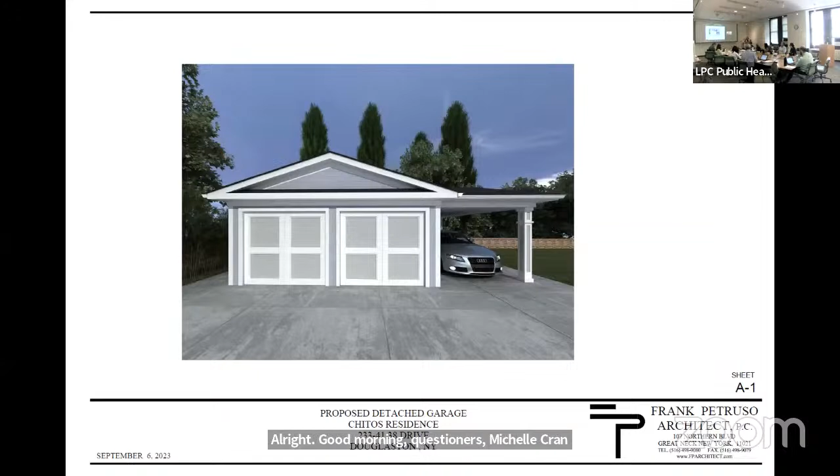Good morning, Commissioners. Michelle Curran, Preservation Staff. The proposed scope of work before you today is to construct a new garage at the rear portion of the subject property. As some background, on the left, you can see the property's location at the southwest corner of the historic district in that circle there. The lot was originally part of a larger lot for a property on Bay Street to the north. Approximately 15 years ago, the lot was subdivided and then the current house facing 38th Drive was constructed in 2009.

At that time, a stable building, also from the property on Bay Street, was relocated to the location behind the house on 38th Drive. Lost my place there. And it was reused as a garage for the current property. In general, this portion of 38th Drive consists of newer houses constructed after the designation of the historic district on subdivided lots from Bay Street, some of which you can see here on the left.

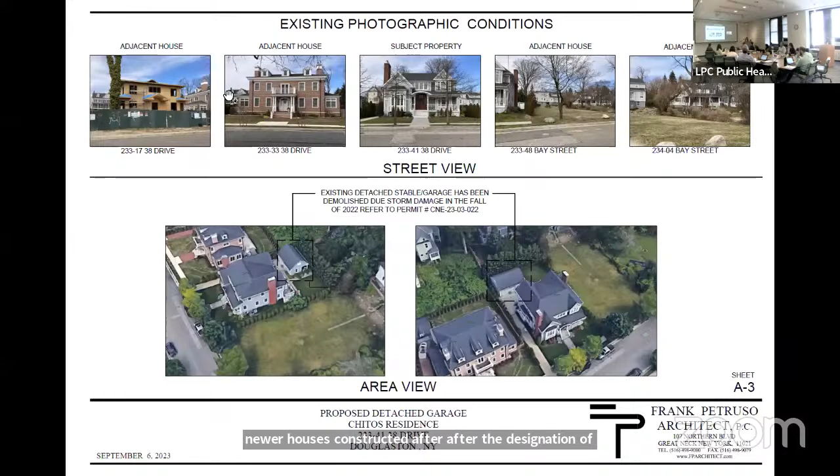Here you can see some additional photos of the property, including the proposed location of the garage on the right. On this slide, you can see additional images of the stable building prior to last fall. In the fall of 2022, the stable was substantially destroyed by a tree that fell during a storm and was then demolished due to safety concerns. Those photos are on the bottom here.

On this slide, you can see examples of garages in the historic district. Due to lot sizes and orientations, detached garages are commonly found at rear yards, are usually modest-sized one-story structures, and often have simple design elements that echo the main house.

And this slide shows renderings of the proposed garage design. This will be situated in the same location as the former stable. Materials and finishes will match the main house, including wood siding and windows, wood doors, and an asphalt shingle roof. And on the right here, you can see the placement of the garage on the lot. On the west side of the property, there are evergreen plantings and a fence shared with the neighboring property.

Here are some details of the proposed garage. And then lastly, here are some screen captures from Cyclomedia imagery showing views of the former stable from the street to give you an idea of the visibility of the garage, the eastern side of which will not be visible from the street. The architect is also here on Zoom and can answer any of your questions.

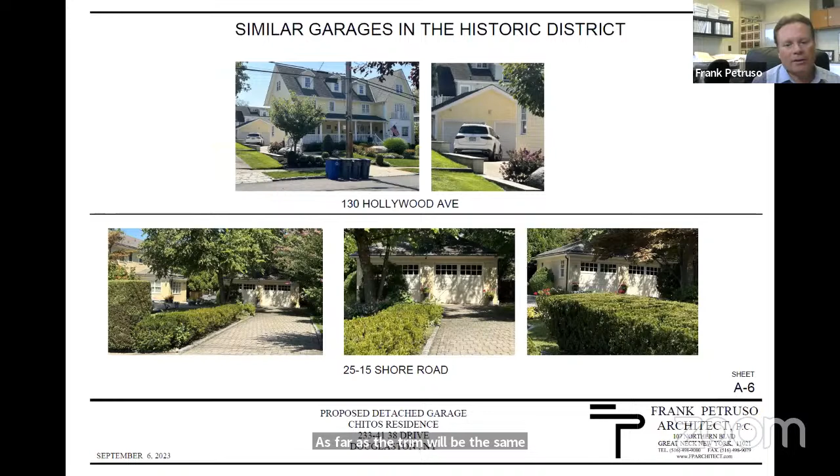I think it fits pretty well with the neighborhood. And there's really not much I can do in a detached garage due to the height limitations. So I think it's appropriate for this design. And the materials will be identical to what's on the house. The trim will be the same. The siding will be the same. It will be cedar stained to match the existing house. The roof trim will be identical as well. And the trim and the fascia will all match the house. So I think it's something that's modest and it does go with the character of the house. And it's perfect for the back of this house.

Okay, thank you. Michelle, can you maybe go to the slide that shows the view from the street? I know it's the previous stable, but that will help us to understand as we discuss it. So the photo on the top left shows the previous stable, and so what we would be seeing. All three do, they're just a few different angles. So you can really just see sort of the left. So it was very minimally visible and came from another property that was subdivided. So it didn't necessarily have a relationship to that house, which is commission approved.

Correct. Okay. 2009. And so the proposed garage will sit, you'll see about that first third of it, the single door essentially is what you're going to see, I think. And then the second door and the sort of overhang will be behind the house and not visible. All right, commissioners, any final questions? All right, let's move to close the hearing. Commissioner Jefferson, would you make a motion to close the hearing? Thank you. And Commissioner Master, would you second that motion? Second. All in favor, say aye. Aye. Any opposed? Okay, the hearing's closed and we'll begin our discussion.

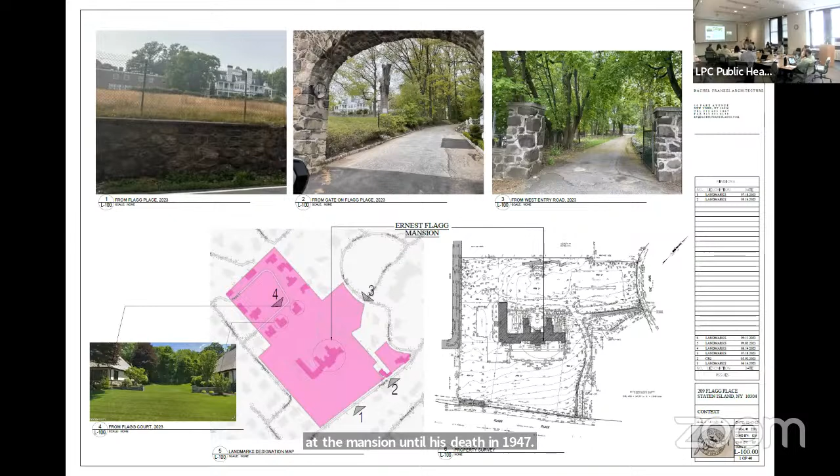Flagg resided at the mansion until his death in 1947. Shortly thereafter, the Pious Society of St. Charles acquired the residence and immediate grounds and converted it to a seminary.

By 1957, St. Charles took down the west loggia of the building and replaced it with a new 20,000 square foot institutional wing. They also added new materials to the mansion's facades and replaced most of its windows. Some of the work was done prior to designation in 1967, and some was done following designation. St. Charles also replaced all the original roofing materials.

The magenta colored drawing is the landmark's designation map, to which we've added numbers representing views of the property. We circled the historic mansion, which is where we propose our scope of work. View 1 on the upper left-hand side of the screen is the mansion as seen from Flagg Place. To its right is view 2, which is the mansion from the entrance gate on Flagg Place. Further to the right, view 3, which is from West Entry Road.

On the lower left-hand side of the screen is view 4, taken from Flagg Court, not to be confused with Flagg Place. We circled the two houses on Flagg Court on the designation map. These late 20th century houses were supposed to provide a view on access into the courtyard side of the Flagg mansion, but as you can see, like the view from West Entry Road, the mansion is not visible. The mansion is only visible from Flagg Place.

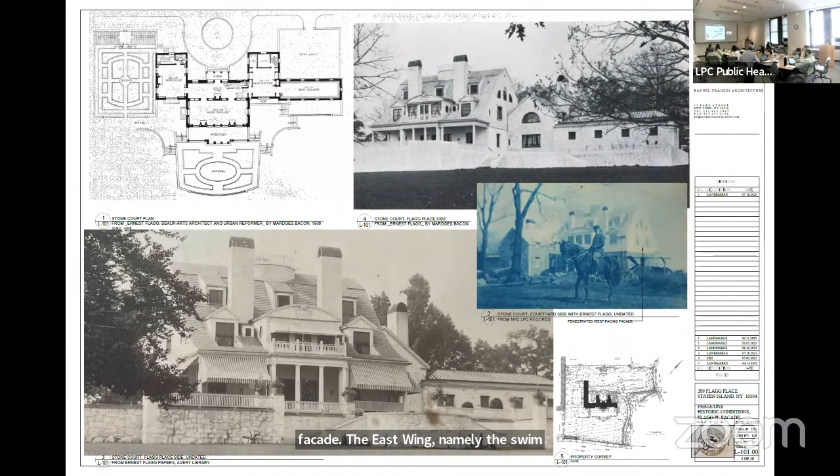Next is a chronology of the mansion, starting with what I call phase one. In Flagg's architectural floor plan, both the east and west two-story dependencies are shown, yet the west dependency, as you can see in the image of Mr. Flagg on horseback, was not built, as evidenced by the fenestrated second-story west-facing facade. The east wing, namely the swim tank with louvered masonry openings, creates an interesting and pronounced asymmetry.

Within 10 to 20 years, Mr. Flagg completed what I call phase two. To the west side, he added three masses comprised of a two-story flat-roofed dependency with pediment and a two-story and one-story gable-roofed dependency. He enlarged and added to the original east dependency, making it similar to the new dependencies on the west side. He doubled the depth and added a pavilion to the long, thin swim tank, thereby adding accessory use saunas. In these new masonry openings, he installed windows, not louvers.

He removed whitewash from the garden walls and did not apply it to any of the new mosaic rubble walls. Additionally, Flagg built an open loggia and pavilion on the west side. Furthermore, and most significantly, Flagg completely reconfigured the roof and facade. He truncated the gambrel roof, eliminating the second floor's large central dormer, small shallow porch, and two pedimented dormers, and created two new covered porches on the left and right.

Under the new second floor porches at the veranda below, he added regularly spaced square columns. A neo-Palladian style is now combined with the original neo-colonial Dutch vernacular, quite an eclectic adaptive creation. Phase three includes the new two-story institutional building, which replaced the west wing loggia and pavilion constructed in phase two. These are images from Flagg Place.

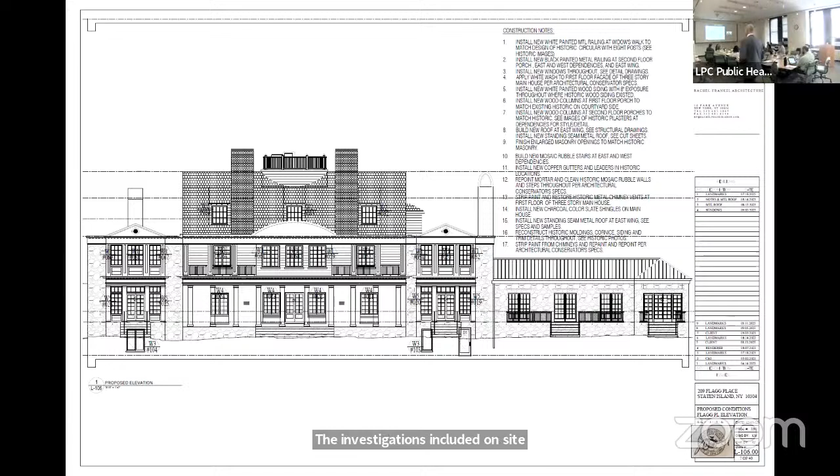Okay, the restorative scope of work is based on investigations by Helen Thomas Haney of Jablonski Building Conservation. The investigations included on-site probes and review of archival photographs from both landmarks and the Ernest Flagg papers at Avery Library. At the sloping roofs, we propose replacing non-historic asphalt shingles with new slate shingles. Here. None of the original roofing remains.

Removing non-historic vinyl siding, which is sort of here and to some extent here and here. The siding and the trim, and to restore or replace the underlying historic wooden siding and trim. This will be handled at staff level. Remove non-historic masonry mortar, which is here.

It includes several non-matching repointing campaigns, of which the majority of the joints have failed and are open. So it's here, and it's here, and it's here. We propose properly repointing with compatible mortar, and this too will be handled at staff level.

Removing non-historic paint at the chimneys, here, here, here, and here. Repointing, repairing, and repainting them with the historic black and white colors, also to be handled at staff level. Remove non-historic white paint here on the first floor and replace with a compatible whitewash. Lastly, replace these non-historic hollow metal ionic columns with a style to match the historic, and this too will be handled at staff level.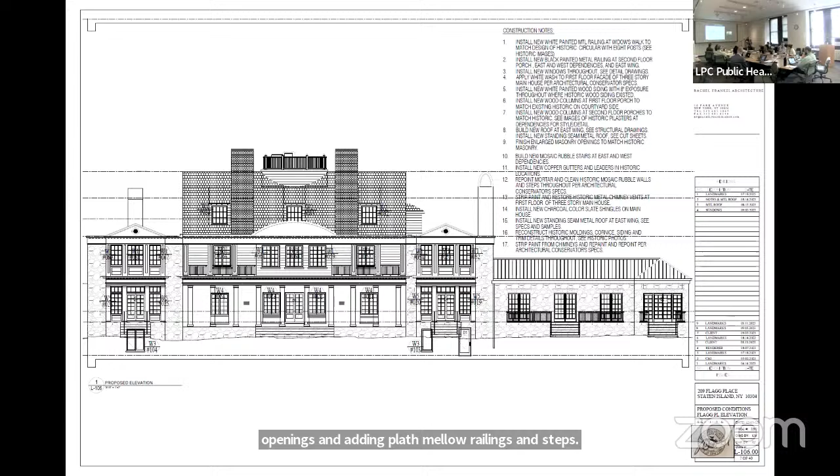At the two symmetrical dependencies flanking the three-story main house, we propose removing the non-historic poured concrete porch at the east dependency and the non-historic cellar enclosure at the west dependency. At both dependencies, we propose constructing new steps in the mosaic rubble stone with black metal railings. And to repeat, the key changes include window replacement, restoration of facade siding and trim, and reconfiguration and regularization of east wing roof lines and masonry openings.

This is the view from Flagg Place. This is the render from Flagg Place, and I note here that the landscaping has been pruned to open the view. The standing seam roof will be darker. I brought in a little physical sample by Commissioner Ginsburg. That's the color we propose. It will be that sort of darker color. And though the dormers and chimneys may look larger, we're not proposing to change their sizes. And this is a zoom of the render, highly privileged view.

Okay, these are the historic conditions from the courtyard side. I'd like you to note that the new mosaic rubble walls are without whitewash, and some of the original whitewash walls now don't have whitewash. These are the existing condition images from the courtyard side. Again, the historic windows are washed in yellow. And our proposed conditions. The restorative scope of work that will be handled at staff level is the same on this side, except that the existing columns here are historic and will remain. Additionally, on the courtyard side, we propose removal of non-historic white paint and mortar, and any whitewash underneath, and restoring the mosaic rubble stone using a compatible mortar.

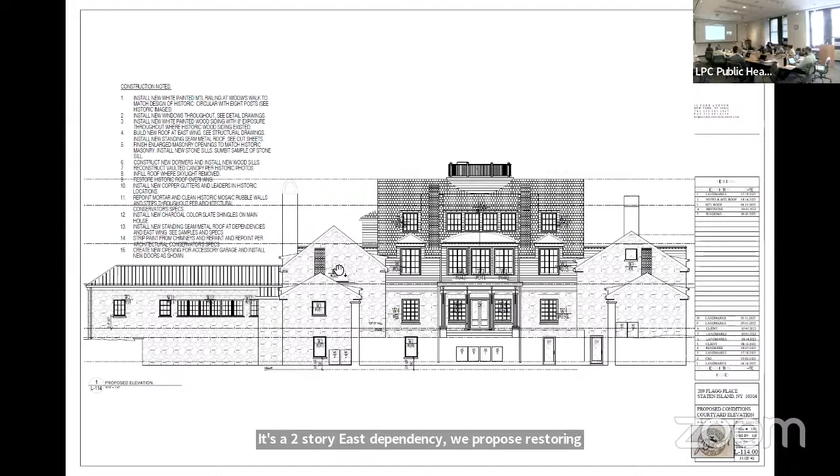At the cellar level of the main house, where the windows are out of sight, we propose lowering the sill heights and installing a single casement without mullions and a door of similar style. At the 2-story east dependency, we propose restoring the semicircular window masonry opening and installing a new window as shown. And at the 2-story west dependency, we propose also installing a window without mullions.

At the north-facing facades of the 1-story dependency, we propose installing new casement windows without mullions and lowering the sill of the window at the cellar level. At the 1-story east wing, we propose lowering the sill heights and at window 0112, widening the opening. We propose installing new casement windows with mullions.

And this is a bit of a comparison between existing and proposed. And to give you the views on the courtyard side, the perpendicular sides of the dependencies. The other side, at the existing chapel, non-historic, in the 2-story west dependency, where the historic windows are casements with mullions, we propose new outswing casements with matching profiles and dimensions. We did not propose keeping or replacing the multicolored lights or church iconography, which are not historic, and you'll see some images of those toward the end of my presentation.

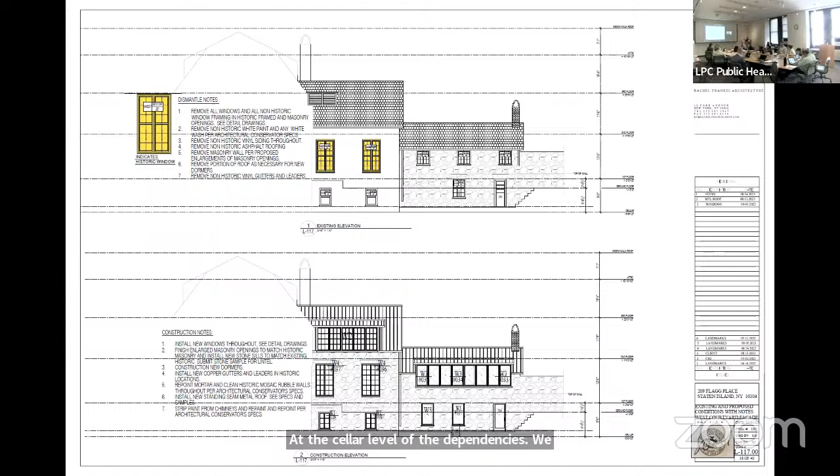At the windows opposite the chapel in the 2-story east dependency, we propose increasing their height. At the east and west 2-story and 1-story dependencies, we propose new dormers at the roofs to provide much needed natural light and air. At the cellar level of the dependencies, we propose dropping the existing windowsills to let in ample light and air.

At the 2-story east and west dependencies, which Flagg conceived at the outset, we propose traditional style casement windows to match the style proposed for the upper floors of this 3-story main house. At the 1-story east and west dependencies, which Flagg added later, we propose single casements without mullions.

These are the east facades, historic image, existing condition images, existing condition drawing, proposed drawing. At these facades, we propose a similar scope of work already described elsewhere. Plus, at the east wing, that long skinny swim tank, we proposed a new opening to accommodate 2 new garage doors, reconfiguration of the roofs, as already discussed in the Flagg Place facade. Lastly, we will look at the west facade, existing and, well, that's the comparison of the east facades.

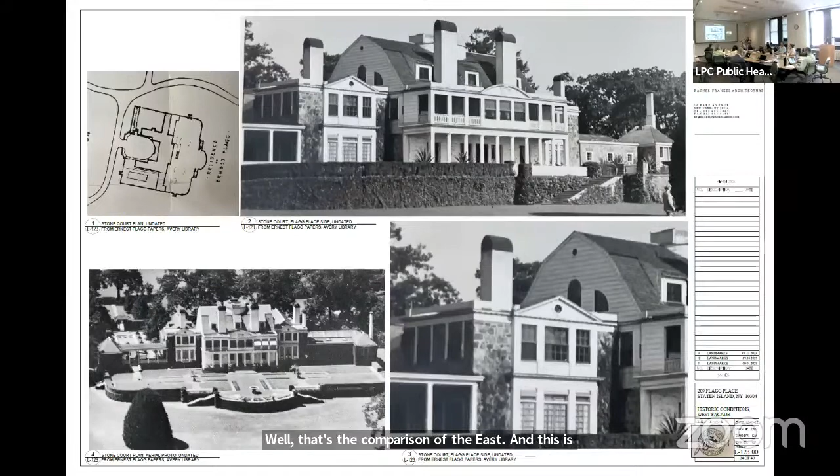And this is the west facades, historic photos, existing condition photos. These are views here, 12, and here to some extent as well. Existing condition drawings showing you the 2 historic windows, and proposed similar scope of work as previously described. And existing and proposed together.

Now I'm going to talk about elements, starting with masonry. In phase 1, all the mosaic rubble walls received whitewash. By phase 2, except for the first floor of the 3-story main house and the 2-story dependencies courtyard facing walls, all whitewash was removed and newly constructed mosaic rubble walls were not whitewashed. Per our conservators' probes and analyses, layers of white paint now cover the historic whitewash.

Hygrothermally, the mosaic rubble walls perform best against moisture infiltration and thermal changes when properly repointed with a compatible mortar and without paint or whitewash coverings. Whitewash by its very nature is maintenance intensive, requiring regular reapplication. It fares better when protected, and therefore we propose whitewash only on the first floor of the covered veranda on the Flagg Place facing facade.

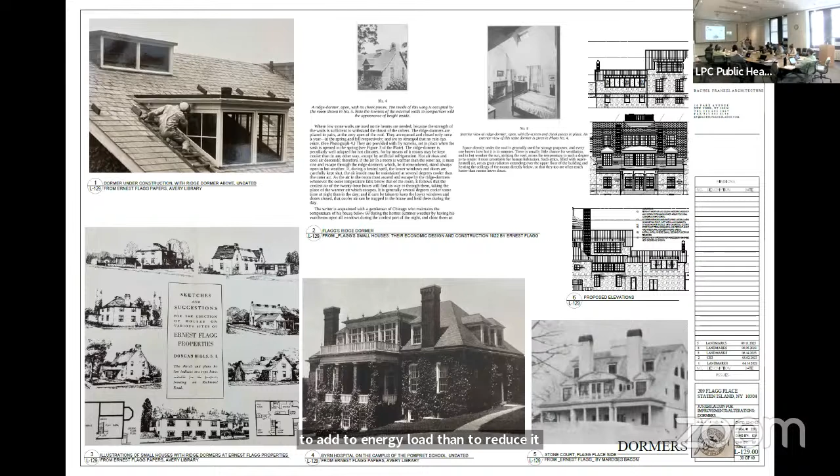We see Flagg's use of a wide multi-light dormer at Byron Hospital on the campus of the Pomfret School, and markedly, no ridge dormers. Contrary to Flagg's writings, ridge dormers are more likely to add to energy load than to reduce it. Furthermore, ridge dormers provide no visual relief from the interior nor connection to the outside.

Alterations to masonry openings and roof lines. So the valley created between phase 1's gable roof and phase 2's hip roof results in an unfavorable condition for shedding rainwater, as evidenced by leaks in the space below. The original swim tank provided for such pursuits when the weather precluded use of the outdoor swimming pool. Phase 2's addition included accessory use saunas. The small masonry openings afforded privacy and conserved heat.

The east wing and pavilion have not functioned as such since one of the seminarians decades ago had an accident from which he fortunately recovered, yet as a result, the swim tank and saunas were eliminated and the space was converted to a reception hall. My client wishes to use the space as a kitchen, dining, and gathering space and wants to enjoy the sprawling views and have easy access to the outdoors. He also wants ample ventilation and light for the kitchen. The enlarged masonry openings we propose recall the openness of the former loggia and present a residential appearance.

The trim and the restoration of the framed window openings will all be handled at staff level. The siding and restoration of roof overhang, and what we've proposed for railings, these two will be handled at staff level.

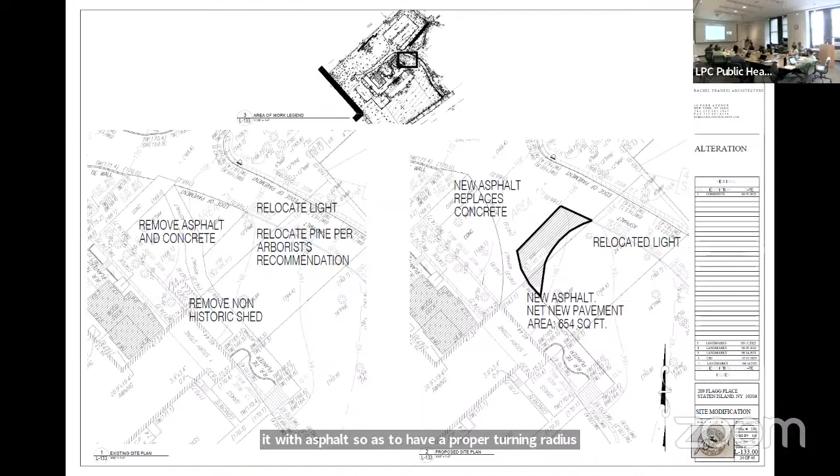For the roof at the east wing, we propose a standing seam metal roof with a 1.5 inch standing seam, one pencil rib down the middle, and in the patrician bronze. And then for the slate roofing, we're proposing this sort of dark charcoal.

In conclusion, I'm returning to our proposed elevation for Flagg Place, where most of the work is restorative, and that which is new is largely not visible from Flagg Place. The proposed work represents what my client believes to be in the best interest of restoring the house, both architecturally and, once again, for single-family residential use. These are the proposals that are important for his moving forward with the purchase. Thank you. Okay, thank you very much.

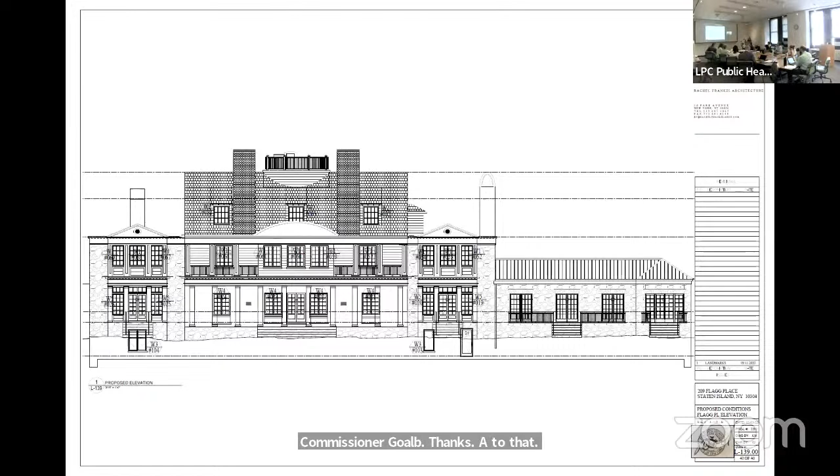A couple of questions. First of all, what's the plan with the 1950s addition? No plan yet. Okay. Can't think about that yet. Can't think about it. Well, wouldn't want to think about it if you can. Why standing seam? We aren't sure what the original roof at the original swim tank was. I think it was glass. Glass is not a good choice for this use. We also want to create a little kind of attic space for insulation and energy conservation. We want to treat it differently, and we think the standing seam is attractive.

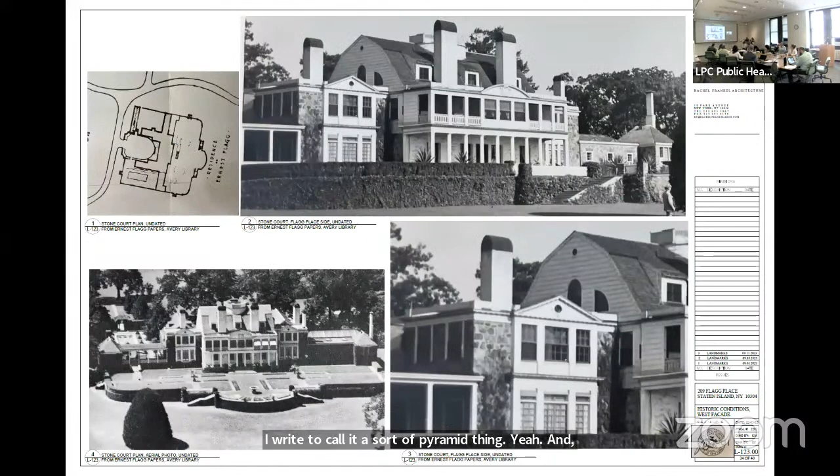Right. Well, I'm actually asking about your page. The pavilion. Right. Yeah, so that was L123. Am I right to call it a sort of pyramid thing? Correct. Yeah, and so, bingo. Oh, yep, there it is. Top right. So what do you think that's made out of?

I do not know what it was made of originally. No original historic roofing material, as far as we have probed, remains. Okay. But Flagg did, in one of his treatises, talk about a kind of an asphalt shingle for his small house book, if you're familiar. And maybe it was that. Could be. All right. It's kind of a mystery.

And tell me a little bit about why you chose to go with, on your courtyard side, a combination of replacement mullioned windows and unmullioned windows. So my client would have liked to have put casement windows with no mullions everywhere. And I got him to a point where he understood that that wasn't appropriate everywhere.

And then I started to think about the evolution of the house and how it changed over time and how some things were new. And Flagg also was always experimenting with materials, new materials, remove it, try something else. And I thought it was appropriate to treat the newer historic buildings differently, and perhaps also give my client what he wanted, which were these unobstructed views. The property is magnificent. Got it. Thank you.

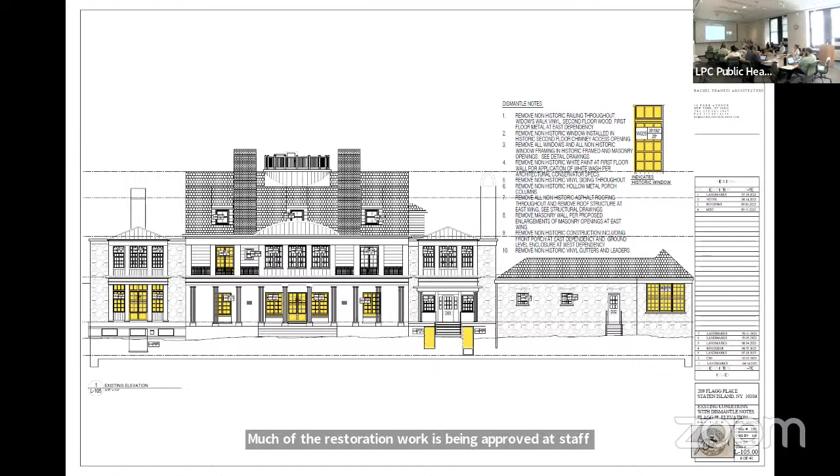Much of the restoration work is being approved at staff level, but there are changes to window openings, both in their size and or creating new openings. New windows, some matching the historic configuration, others not matching the historic configuration. I think the change in material is also before us, and change in the roof lines and roofing materials and the railing materials. So we have a lot of components to discuss, and we'll begin that discussion now.

I think I'm going to start with Commissioner Goldblum and then Holford Smith, because I know you both were at the site visit. I know Commissioner Holford Smith, you have a history with it as well. So I think that will be good for setting the discussion off. Okay, Commissioner Goldblum. Wow. As Fred had said, I mean, it's a relief. Thank goodness for rich people.

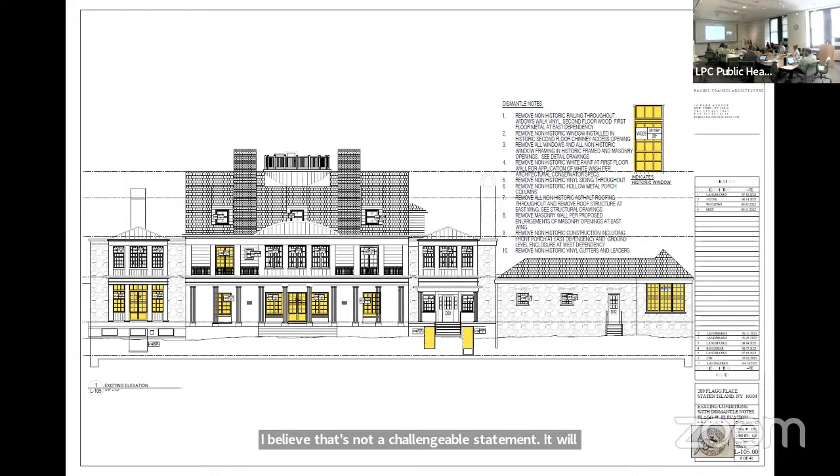It's a relief from a historic perspective, if not from a housing count perspective, that this property is going to remain intact, and that the landscape, which I think was very much a part of the initial design intent of the architect, I believe that's not a challengeable statement, will remain as intact as it currently is. That's a real blessing. That said, however, I think it's important, I say to myself, to resist the bias of lowered expectations that might come about from having been expecting to see something quite a bit worse.

And I think that I take Everardo's comment very seriously, and that, this is an individual landmark building by a noted architect, and it's not really an adaptive reuse. It's an adaptive use. It was a house. It had a period when it wasn't a house, but it's going back to its original use, which is as a single family house, which is both good and also, I think, important, because I think as a commission, we do consider adaptive reuse, the demands put on a building by adaptive reuse to permit perhaps a different view of appropriateness than we would in other circumstances.

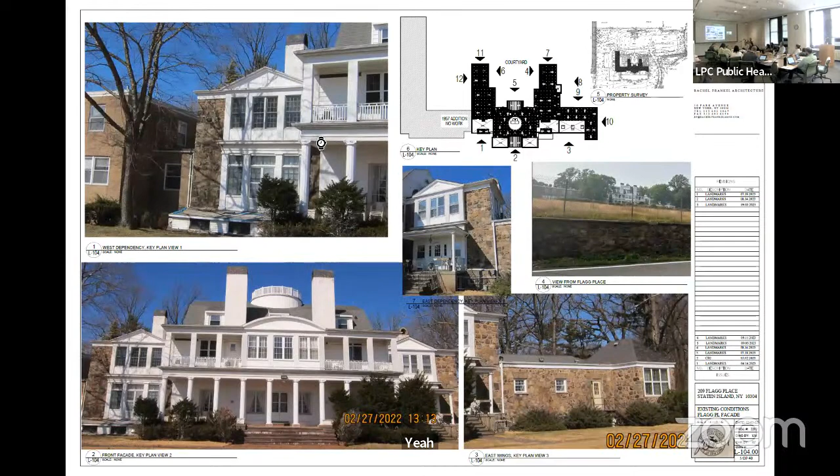That broadly said, forms background to how I think about this. I think that we have different facades. I think that the most important facade, number one, is the one facing downhill, the one that we see on the screen now. And I think generally the things that are proposed here are appropriate. I think that the modifications to the windows, the replacement of the historic windows, even the change of the operation of the windows to outswinging is appropriate.

I do think that screens are kind of one of those necessary evils that we have nowadays. I say as I scratch my mosquito bites from my bad screens. They're important, and I think they do, however, really impact the way a historic building is seen. So I think it's a good decision.

I think that the modifications to the openings in the swimming pool wing are appropriate. However, I think that the roof modifications, both the material of the pool wing could theoretically be a non-shingle material. Glass would have been nice. It's funny, most people like to put glass in these things nowadays, but I think that standing seam in and of itself could be appropriate for that wing, not for the end pavilion that used to be the sauna. That should go back to being a shingle product, either slate or wood or something of a similar nature.

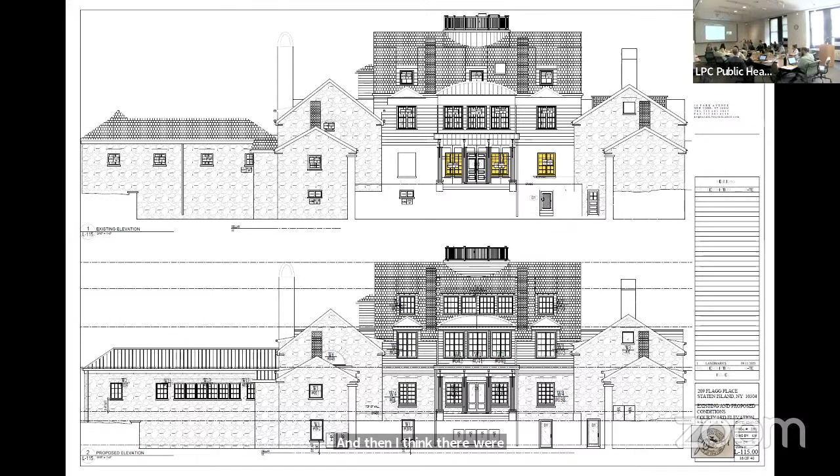The dormers, I know that they're necessary, but I do agree with Michael that some of the dormers are overwhelming, and I will refer to basically what he said. The garage door, I think opening is appropriate and necessary. The railings are fine. And then I think there were some issues on the primary facade, the openings where the kitchen is. I think Michael was okay with it and said that it might be a little bit too dramatic. I'm a little bit torn. I do understand that that's a kitchen use and that they probably do need a little bit more light. So I'm actually okay with the openings on that wing, because I think it's important for the use. And then in terms of the roof, I'm going to defer to the architects and the experts and see what the group says. Okay, thank you very much, Commissioner Lutfi.

Well, I would say this side of the table has done an excellent job. And hold up this side. Yeah, that's going to be you, Fred.

I'm going to agree with a lot of what has been said, but I'm going to really just visually point to something, which I think everyone has mostly mentioned: when you look at the front facade, the before, the original, and then the after, the thing that gives me pause concerning the windows is that they really start to overwhelm the facade. Instead of looking at the building with lovely windows in it, you're looking at the windows, and maybe there's a little bit of facade around the edges. So I think all the comments about these windows, some of them also including expanding the size of the windows where it makes sense, are appropriate and I agree.